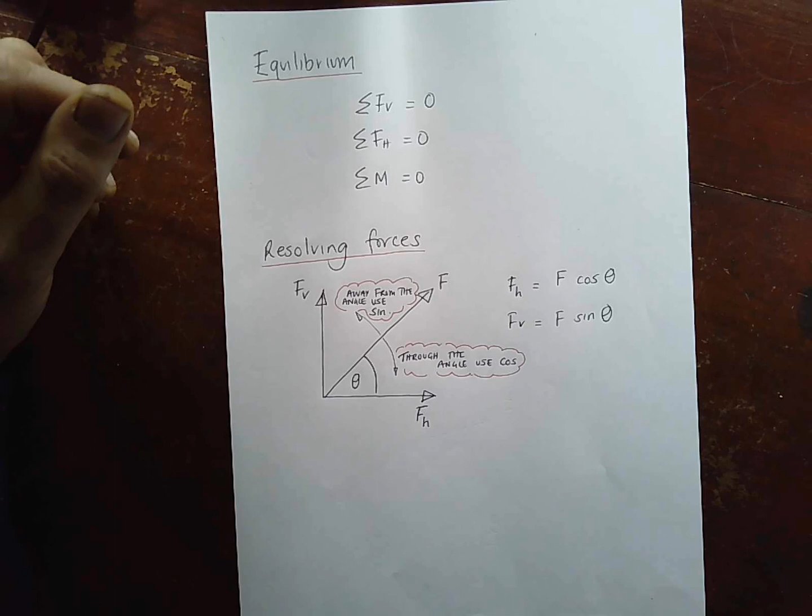One or two fundamental things. Equilibrium, right? Can someone explain to me what equilibrium means in terms of forces? Have you heard that phrase before? That is when a chemical reaction reaches equilibrium, I suppose.

In terms of forces, equilibrium means that everything is balanced. So if you've got something that is in equilibrium, in effect it will be at rest or travelling at constant velocity, because there'll be no resultant force, or the resultant force of all the things acting on that body will be zero, so it won't go anywhere or do anything.

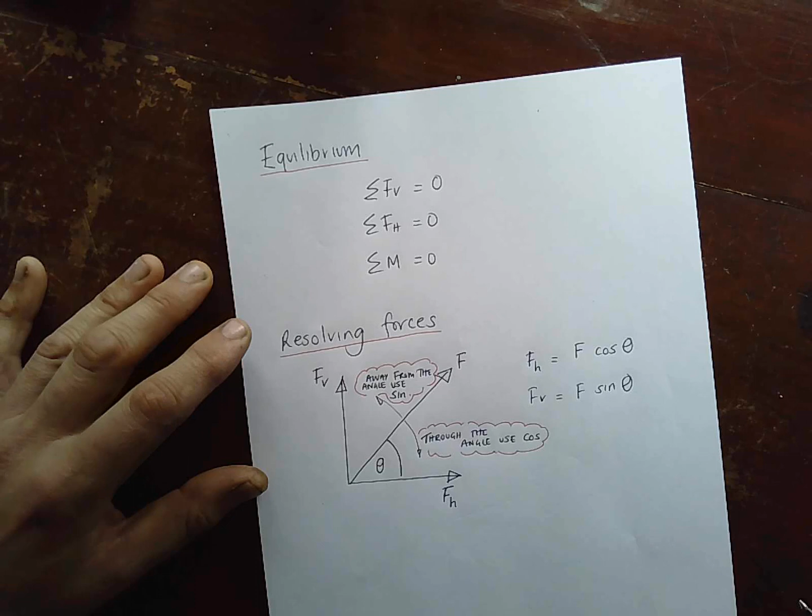Right? So if I've got a body that has forces acting upon it, so it could have a force acting in that direction, one in that direction, one in that direction. If that is not moving, then we know that all of these forces are balanced. This thing is in equilibrium. And so if I add up all of these forces, taking into account their directions, then they will add up to zero. So they're balanced.

Now, this is a mathematical way of writing that. So we've got vertical components of forces, we've got horizontal components of forces, and we've got moments. So there are three conditions for equilibrium really. You've got to have your vertical components balance, and your horizontal components have got to balance, and all add up to zero.

And also you can't have any moments in there as well, because if there were forces not acting at a single point but acting at two ends of a long body, so you had a force acting this way and a force acting this way, if those forces were equal and opposite, then that would fulfill these two parts of the equilibrium, because they will balance each other, so it wouldn't move anywhere.

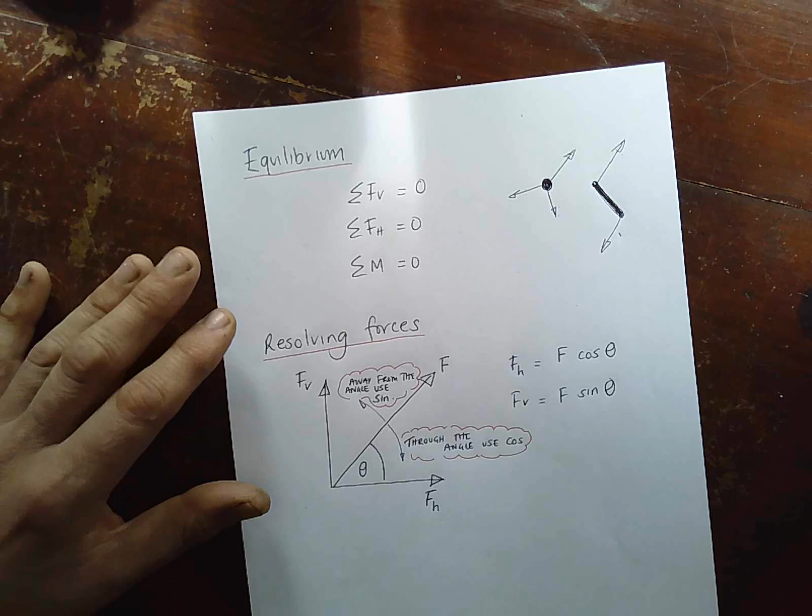Now we don't actually come to do much with these at this level or in this particular unit, but there are more complicated sets of forces and turning moments, where you have to work out the resultant force and the resultant turning moment and the distance of that turning moment from the line of action and all that kind of stuff. But we don't have to do that. You'll be glad to know. But we do need to have a good understanding of what equilibrium is, because there's a few questions and a few problems that I'll be showing you in a second. So you'll need a pen and a bit of paper for this.

And also, what we were doing last time: any force, so I've got a force F here that just happens to be going up at this angle, you can divide that force into a vertical component and a horizontal component. And that's important, because if you've got more than one force acting, it's very difficult to add them up taking into account their different directions. So what you have to do is what's called resolve forces. Each force in a system is resolved into its vertical and horizontal components, and then you can very simply add those two sets of components up and come up with your resultant fairly straightforwardly.

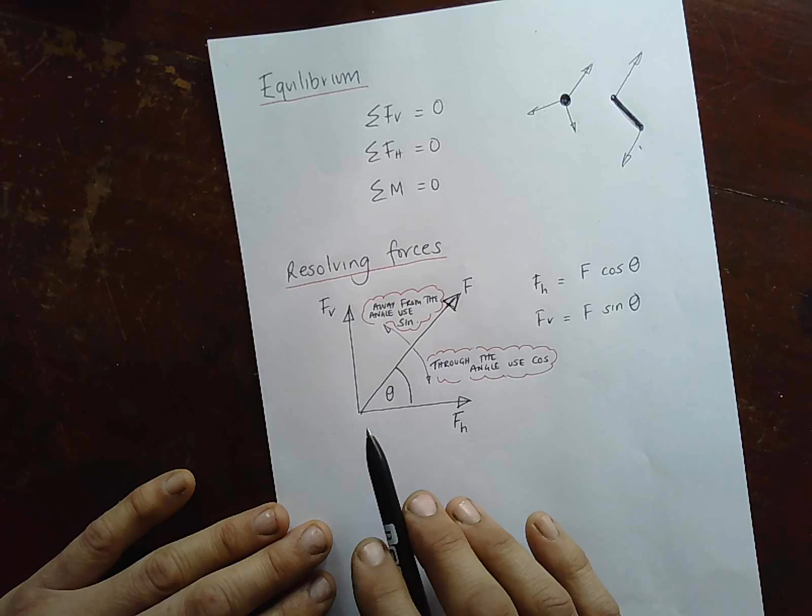Now, we did cover this last time, so hopefully I won't be telling you anything stunningly new, but it's just a quick reminder that in this particular scenario, where theta is that angle there and that angle is known, then if this is the force F, and I want to find the horizontal component, I'm going through the angle that I know, so F_H equals F cosine theta.

And the vertical component, if I rotate my force arrow, is moving away from the known angle, so that will be F sine theta. Now these aren't fixed. These are only true if you've got this particular scenario and this particular angle.

If I was to change this so I had this angle, then these cos and sines would actually flip over. So instead of trying to remember this, because it only relates to this one example where this is the angle that we're talking about, it's best to try and remember that if you want to translate or resolve a force through an angle, then you use the cosine, and if it's away from the angle, the known angle, then you use a sine. And we'll come to that when we do some examples in a second.

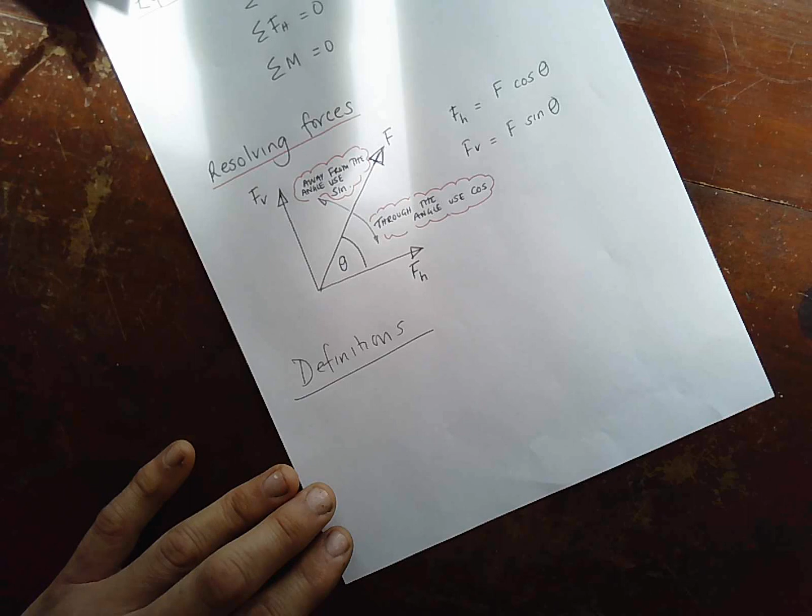There are another couple of definitions that we ought to just cover that are going to be on this first set of worked examples as well. So in terms of definitions we've got resultant and we've got equilibrant. And they're a couple of different types of forces.

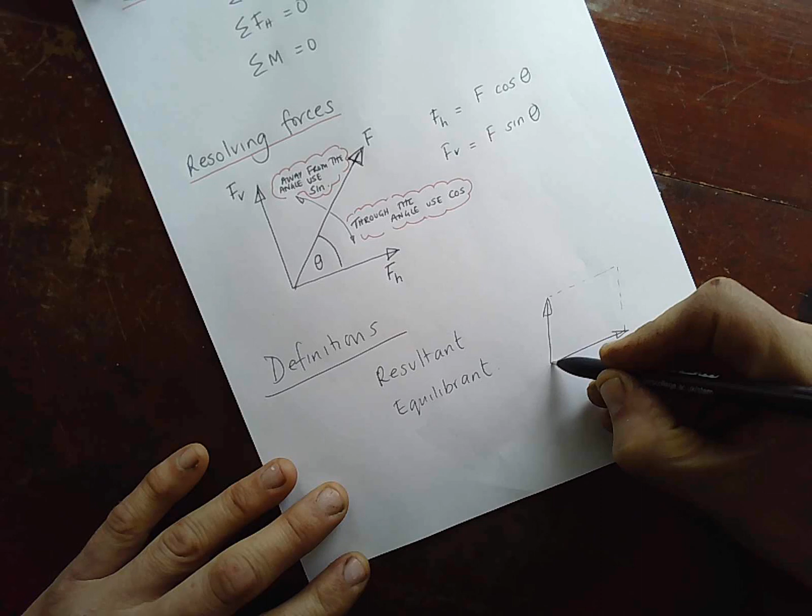So if you've got some forces acting, so you've got a force acting up there, say, and you've got another one acting over here, you can determine what the resultant force is by drawing your old parallelogram of forces, and that there would be your resultant. So that is a resultant. And this would be an instance where this system isn't in equilibrium, because if it's got a resultant force, then obviously these rules aren't true anymore, because if it has a resultant force going in a particular direction, then it'll go in that direction. So the sum of the forces acting on that point won't be zero, so it will be shifting. And that's the whole point of an equilibrant.

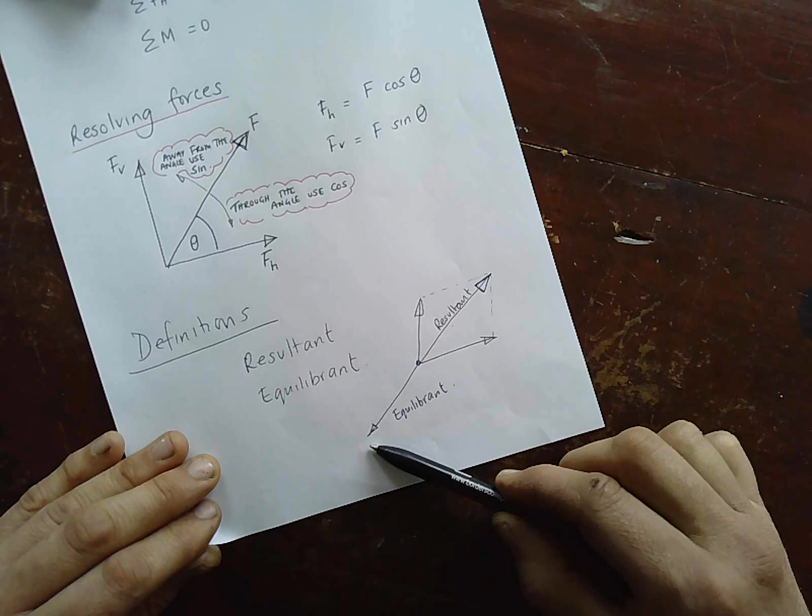So an equilibrant is a force that is opposite and equal in size to the resultant. And the idea of an equilibrant is that it will supply the force that is going to bring this system into equilibrium. So if you've got two forces acting that way and you're trying to find the force that you need to apply to rebalance that system, first of all you'd calculate the resultant, because that's the effect of all of the forces in that system just being replaced, all of the individual forces, with one resultant force that's the equivalent, and opposite and equal to that would be the equilibrant. And the equilibrant, if you added that into the system, would bring this system into equilibrium. So it would balance everything out and stop everything from moving. So we need to know those two definitions.

And I said I'll try and get this videoed and sent through to you.

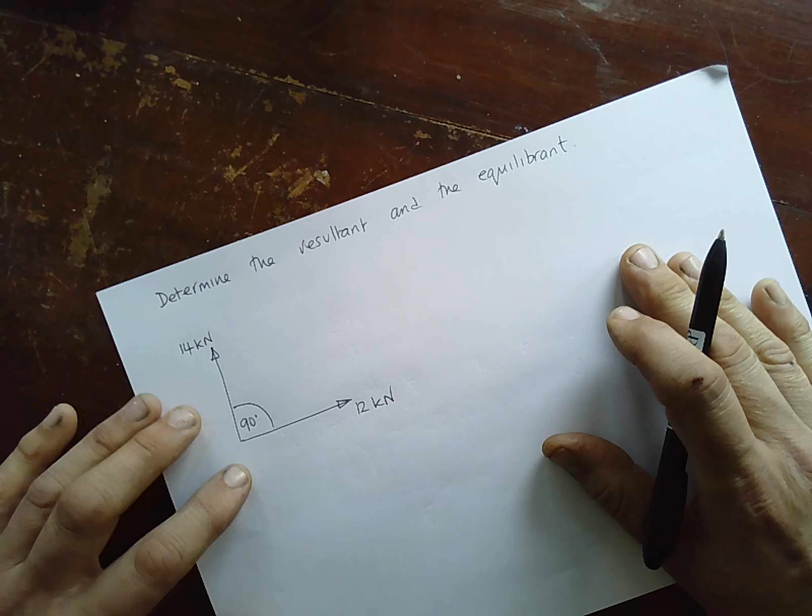So, question time. Determine the resultant and the equilibrant of this system. What is here? So, you know the angle and you know two forces. So we don't have to resolve anything in this case. It's a fairly simple method. Because these are at right angles, it's nice and easy. We can use Pythagoras. So if I complete this, what would be a parallelogram of forces, but now it's like a rectangle of forces, because it's at 90 degrees.

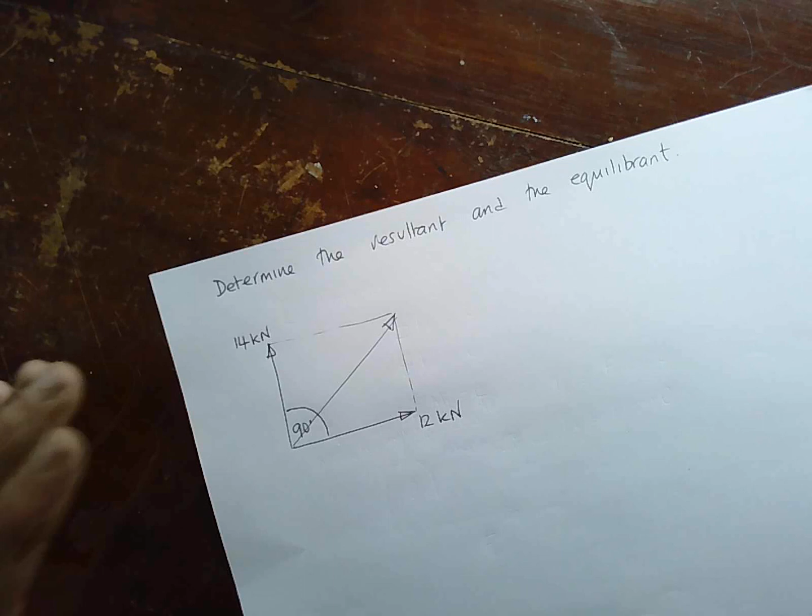And I know that if I was to draw this out on a piece of graph paper full size, I'd be able to measure these things with a ruler. And so if I had 12 centimeters that way, 14 centimeters that way, and then completed this square and then drew the diagonal in across there, then if I measured that, that would be the magnitude of my resultant, and if I measured that angle there, that would be the direction of my resultant. But we're going to work it out using maths, and we can work that out quite straightforwardly using Pythagoras, because we know that that's a right angle there, because if that's a right angle, that must be a right angle, so must that and that.

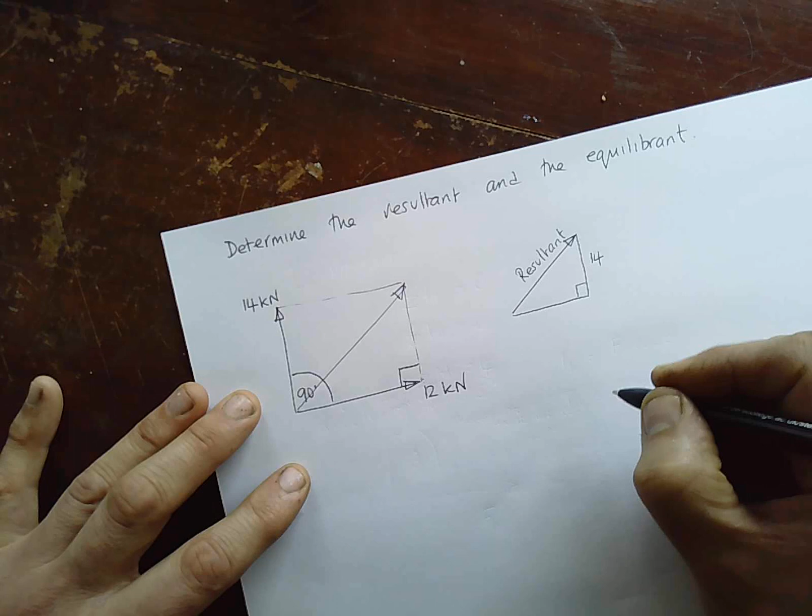And so I know that this dimension of this triangle here, if we just redraw that triangle to make sure everyone can see it properly. So that's what we're after. That is going to be our resultant force there. I'll call that resultant. We know that that's a right angle, and we know that that height there is 14 kilonewtons, and that length across there is 12 kilonewtons. So quite straightforwardly we can use Pythagoras to work that out.

So we know that in this case r squared equals 14 squared plus 12 squared. And so we can add those up and find what r is. Now we also need to be able to find theta.

And we can sort of intuitively know that if this is 14, if that was 14 as well, then this one will be at 45 degrees. But we know that it's not that because they're different sizes, so our angle here will be different. We would expect this angle to be smaller than, or would we? Depending, actually, if that's only 12 and that's 14, which way would it be? This angle would be smaller than this angle. So we're expecting this one to be over 45 maybe, and we'll work it out.

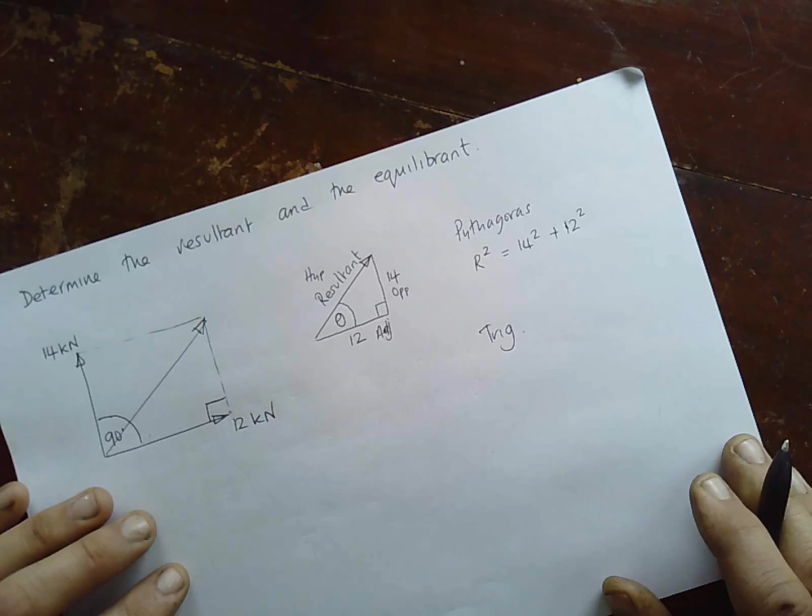So again, basic trig this time. And then what have we got? We've got a hypotenuse, and that's what we're trying to work out. We've got an opposite and we've got an adjacent. And so we can do the tan of the angle, can't we? So I know that tan of theta equals 14 over 12, and so I can calculate what theta is. So get your calculators out and just do those two quick sums for me, please, and tell me what theta is and also what the resultant magnitude is.

And I'm getting you to work it out for a number of reasons. A, to make sure you're still awake, and B, because my daughter's stolen my calculator.

So 49.4, that sort of thing goes in with my impression that it's going to be a larger angle than 45, so that's probably true. What did you get for the R? 340. We've got 14 kilonewtons and we've got 12 kilonewtons, and you're saying that this one's going to be 340 kilonewtons. I'm pretty sure you did too.

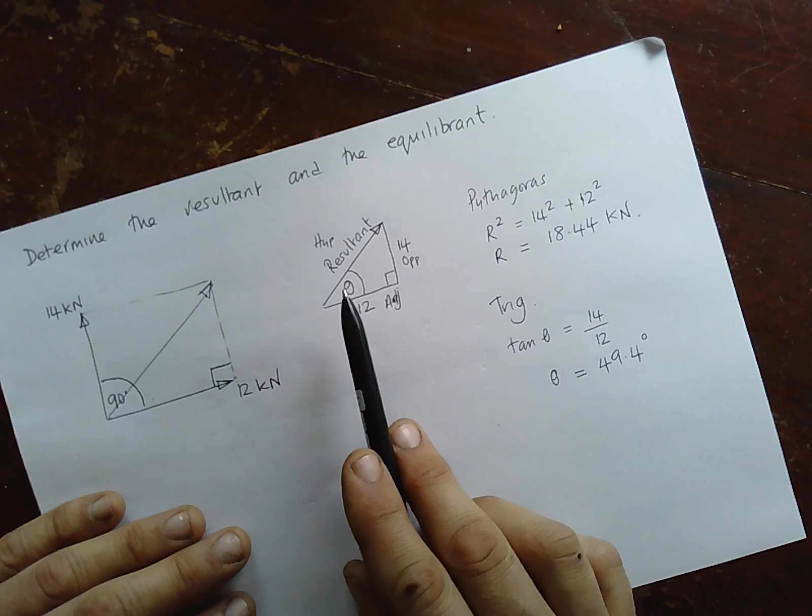Yeah, if you look at some of these things, don't just accept what your calculator spits out. That should have been screaming at you that, hang on, I can't suddenly convert 14 kilonewtons and 12 kilonewtons into 340 kilonewtons. That just doesn't scan. So I get the square root of that, which is 18.44 kilonewtons. Okay. So if I was to describe that resultant force, I would say the resultant has a magnitude of 18.44 kilonewtons at an angle of 49.4 degrees above the horizontal.

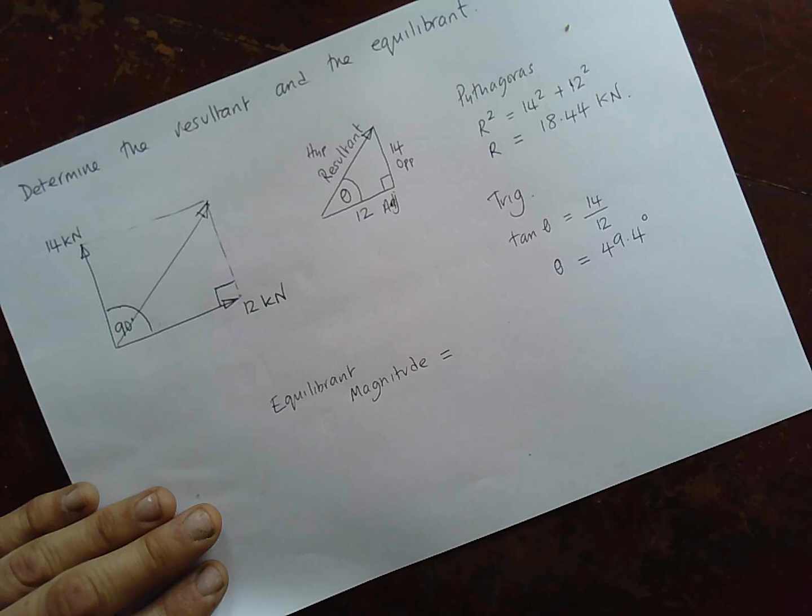Now, if I was to calculate the equilibrant, what would that be? What would the magnitude of my equilibrant be? We've got a resultant going in that direction. We've got an equilibrant now. I want to know the size of the force that's going to balance this resultant. So what's the magnitude of that equilibrant going to be? Have a guess. It's exactly the same. It's the same but in the opposite direction. So the magnitude is going to be the same.

So it's going to be 18.44 kilonewtons, but the direction, if we want to cheat, I suppose we could just say opposite the resultant. Okay, it's probably the easiest way to describe it. Otherwise, you would describe it as at an angle from something, but it's fairly obvious. If you've got a nice little picture in there, then in a direction opposite the resultant should be all right. Now you will need to be able to do that to determine the resultant and to then state what the equilibrant is, because you will know that one is the balancing force for the other.

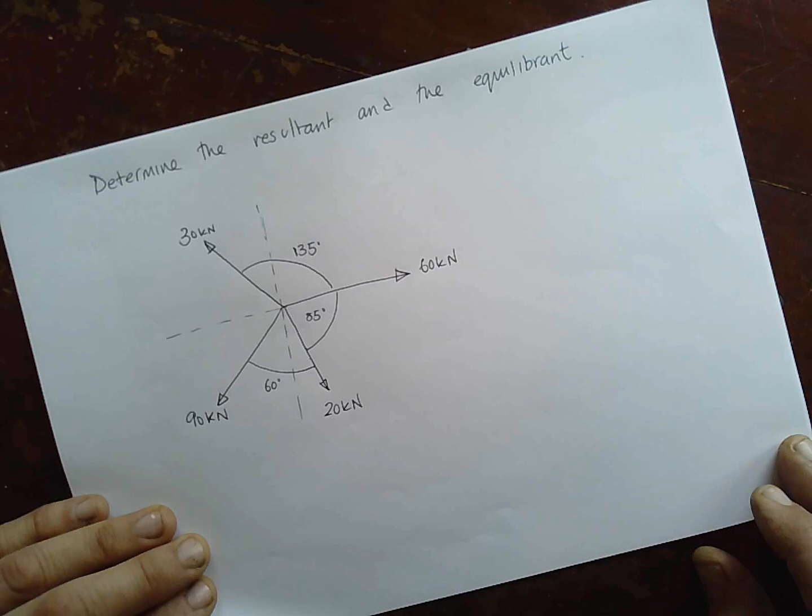So this one is a whole lot trickier, but the same or very similar question. So the resultant and the equilibrant of this system is a bit more complicated. So in this case, we've got to resolve this into a series of vertical components and horizontal components. Then we've got to draw an equivalent system consisting of just two forces, one vertical and one horizontal, and then we can do the same thing we did before. So the idea of these is this one's only got two forces in, this one's got several in, but effectively it's the same methodology behind it. It's all about determining the resultant. It just gets a bit more complicated, that's all.

Now the first thing we can see here is that we have some angles that are given, but the angles that are given leave us having to work a few things out, because what we're going to have to do here is find what the sum of the vertical components are and the sum of the horizontal components are. So we'll do that in a second, but in order to do that we need these angles. So these are the given angles. 85 is fine because 85 is in comparison to like the horizontal, so that's a useful angle.

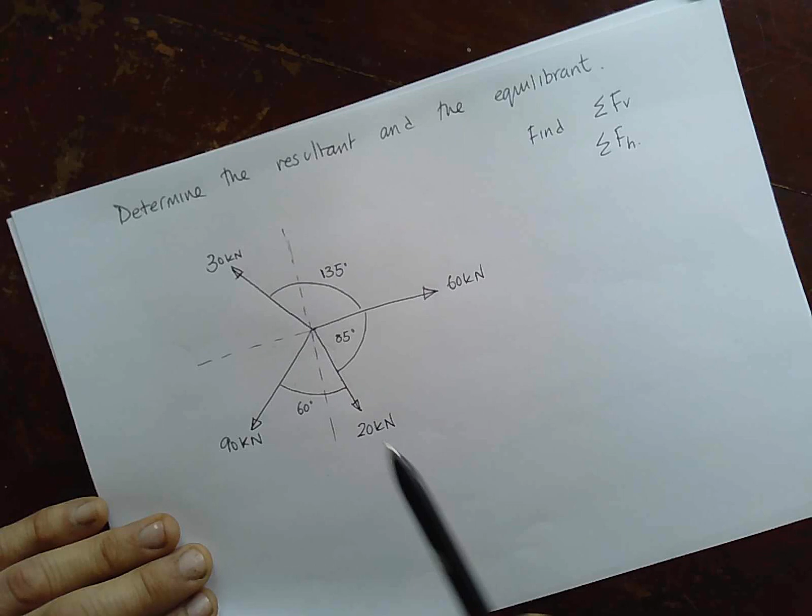These ones are less so. Right, so what we really need is that angle there between the horizontal and there, and that angle there between that force and the vertical, and that angle there between that force and the vertical. Currently the sum of those two is 60, and the sum of that lot is 135. So that angle there, what size is that angle? Just that part of that 135. Which leaves us with that one, which must then equal what?

And then we've got this bit. And this bit. Right, so don't sit there struggling, scratching your head about these big angles. You need to be able to just write them in. It's all a matter of saying there's 90 degrees in a right angle, and you can work them all out from there. Now this gets a bit more complicated because we're actually going to resolve forces now.

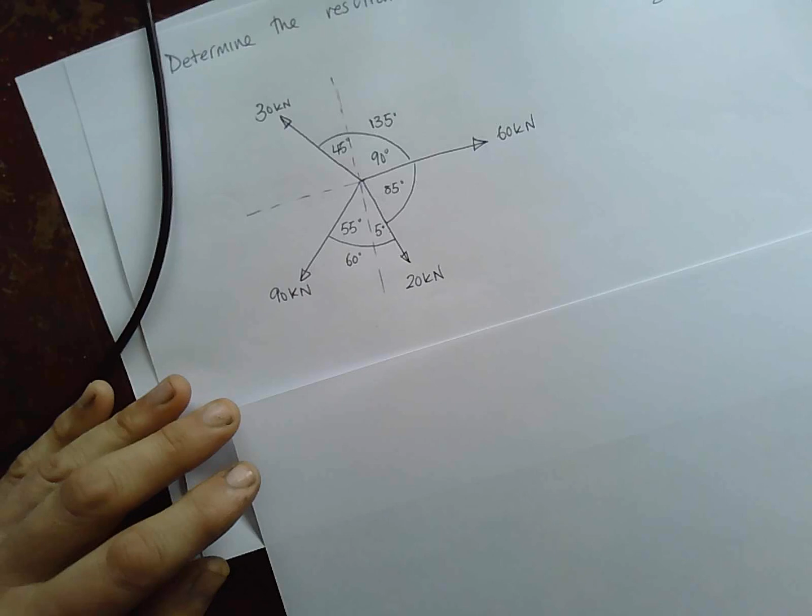So we're going to use this stuff about how to resolve into horizontal and vertical components. What we're going to do is consider each force in turn, and for each force determine those two components, or rather we're going to do all the vertical ones first and then all the horizontal ones. There are four forces, so this is going to get a bit complicated, so you might want to follow this on pen and paper as we go. So let's start with the sum of the vertical forces.

So all the vertical forces. This 30 kilonewtons here is going to have some vertical effect, and that vertical effect is going to come through the angle. Remember our little rule of thumb, that if you go through the angle you use the cosine. So I know that my component of that force in the vertical direction is going to be 30 times the cosine of 45. So that's that one.

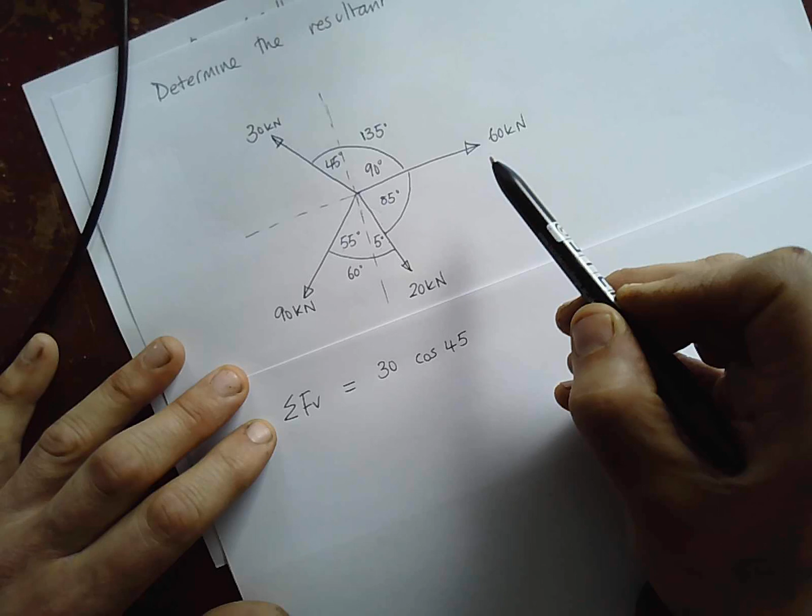Let's have a look at this 60 kilonewtons. Any ideas what the vertical component of that's going to be? You don't have to work it out. It would be 60 cos 90, but what's the cosine of 90? I don't know actually. It should be 0, shouldn't it? Let's have a look. Cosine of 90 is 0.

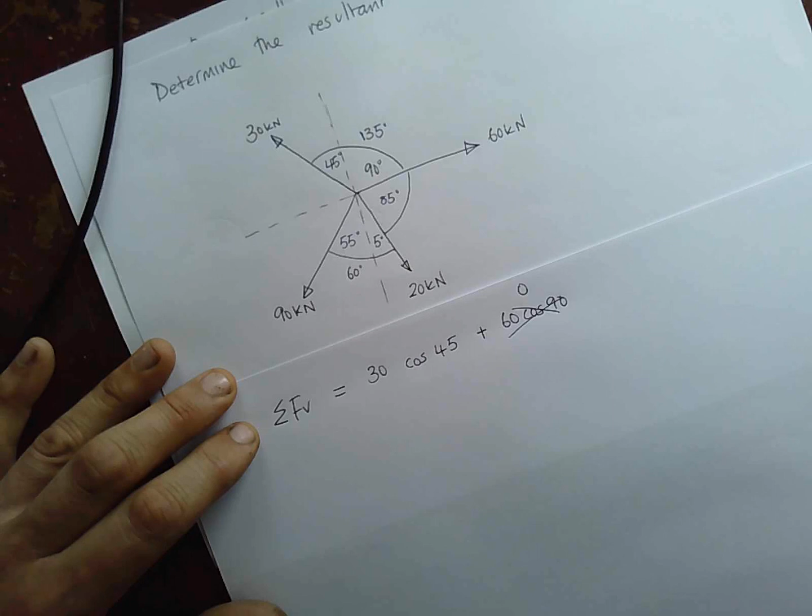So there is no vertical component of this horizontal force, and that makes sense, because if something's horizontal, then it's having no effect whatsoever in the vertical, so you don't get anything. So you can either put in 60 cosine 90, but you don't need to, because you know that's going to be 0, because the cosine of 90 is 0. And it's horizontal, so it has no effect in the vertical plane. Do you get it? Right, so let's carry on going round then.

Now I've got 20 kilonewtons here. So I've got a choice now. I can either use this angle or this angle. But I'm going to try and use lots of cosines, I think. As long as I've got the size of the angle that I'm going through, I can use cosine. So this 20 kilonewtons is going to be in the opposite direction of that one. That one's going upwards. This 20 kilonewtons is going to have an effect downwards. So it's going to be minus. That's the positive direction. We ought to really say that. That's the positive direction, and we'll have that way as the positive direction of the horizontal stuff.

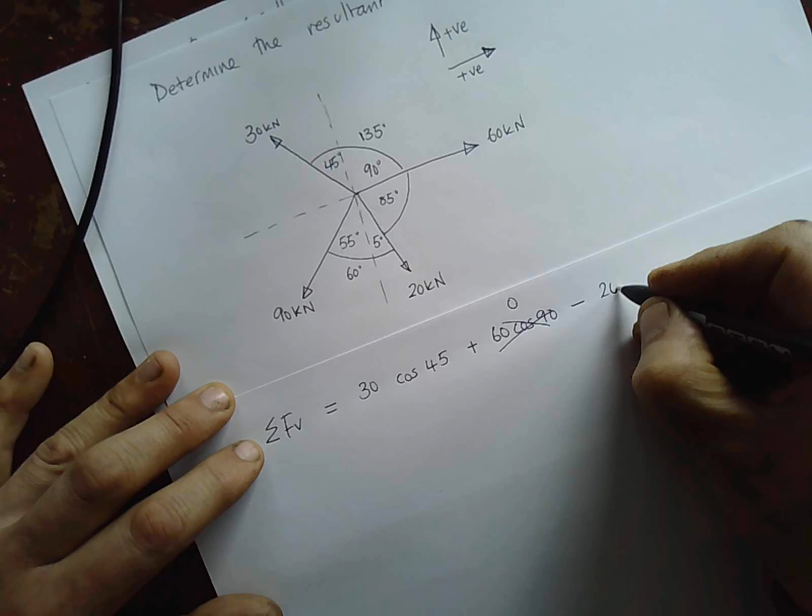Positive vertical, positive horizontal. Okay, so because that's coming down, I'll say it's minus 20 kilonewtons cosine of 5. And this 90 kilonewtons here is also coming down, and I know that's 55 degrees, and I'm going through the angle again, so it's minus 90 times the cosine of 55 degrees. Right? I'll let you work that out in a minute. So those are the vertical components, and if you add all of those together, you can replace all of these with one single equivalent vertical component, and we'll do that in a second. But let's get all of the horizontal components this time.

Again, we're going from left to right as positive. So we've got that one, and that is just going to be 60 kilonewtons because there is no angle, as it's directly in that direction anyway.

And that is going to be plus this 20 kilonewtons, because it's on this side of the center line, it's going to have some effect in this direction. So that's going to be 20 times, if we put it through there, the cosine of 85. Or I could use the sine of 5, because I'm moving away from 5, but I'm actually moving through 85. And you'll find that the cos of 85 is the same as the sine of 5. That's just how the cosines and sines work. So it doesn't matter which one you use, as long as you use the right ratio.

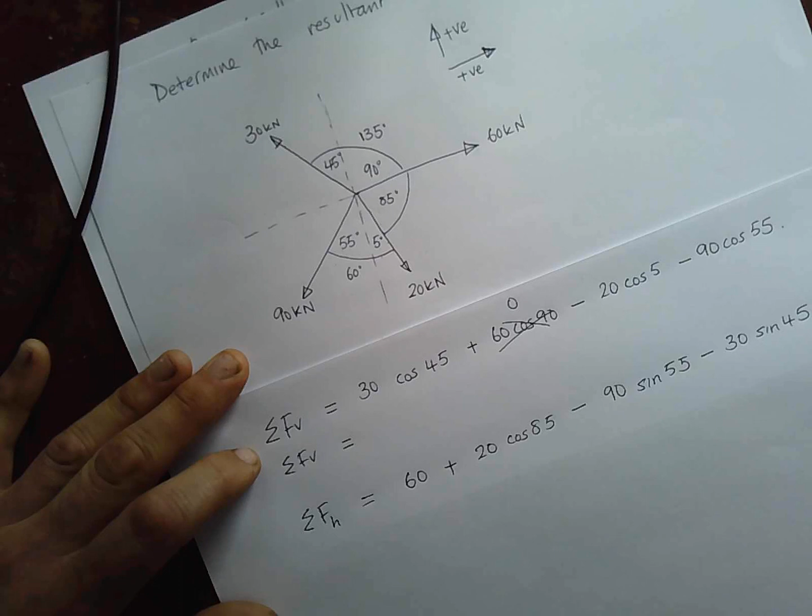And these two forces then, these will be working in from right to left, so there'll be minus ones. So in this case we've got 90, and we're winding up, so we're going away from that 55 angle. So that's going to be sine of 55. And we've got this 30 kilonewtons, again it's going to be going in this direction, so it's a minus 1, and that too is going to be rotating that way away from the known angle. 30 sine of 45. Right, so work those out for me and add them up. So I want to know what the total vertical components are, and I want to know the total horizontal components, please.

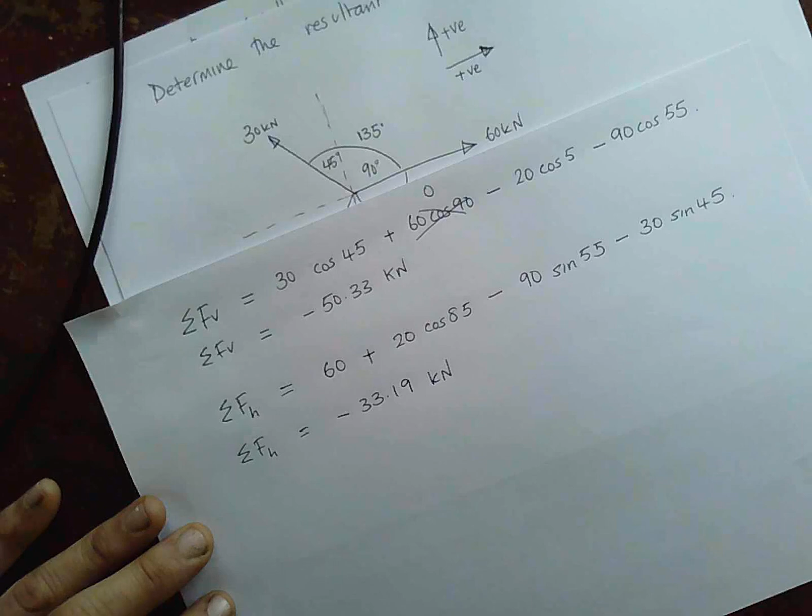Anyone got an answer for the first one yet? I got that as well. Minus 50.33. And these are in kilonewtons, remember. You have to get your units right. Does everyone agree that it's minus 50.33 and minus 33.19 kilonewtons? Oh, Drew's giving me the thumbs up. So what do we do now?

Well, we've now got two forces that if we apply to this system will enable us to replace all of those forces that are currently working. But we need to be a little bit careful, because if we remember our positive directions, so we said that one is going to be the positive vertical direction, that one is going to be the positive horizontal direction, and both of these ones are negative. So we're going to have a vertical component of this force now that is acting downwards that way, and that is going to be 50.33 kilonewtons. And we're going to have a horizontal component going in the negative direction, and that's 33.19 kilonewtons.

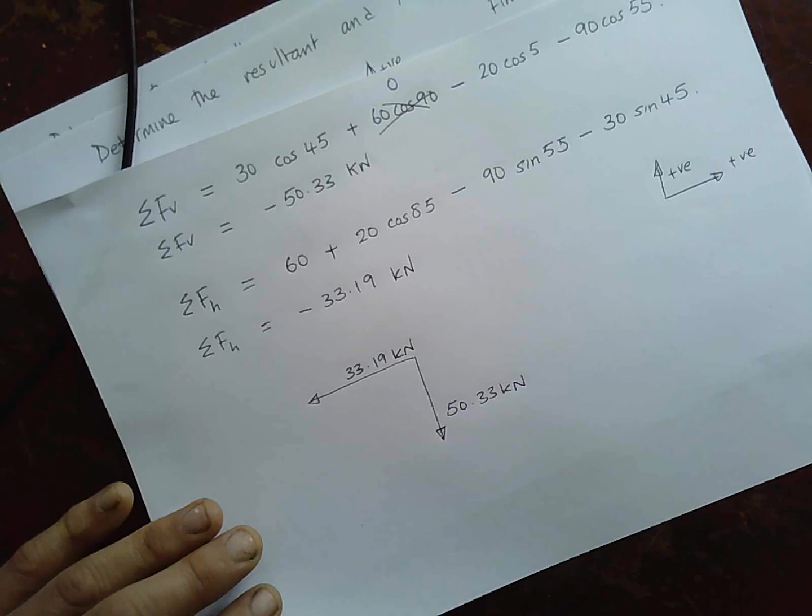Okay, so all of a sudden now, that horrible complicated system of 1, 2, 3, 4 different forces all acting at different angles, we've simplified it into two different forces by being able to add up all of the vertical components and all the horizontal components of everything. So we've simplified that system down into two forces, which turns it into this problem again. All right, so now it's simple.

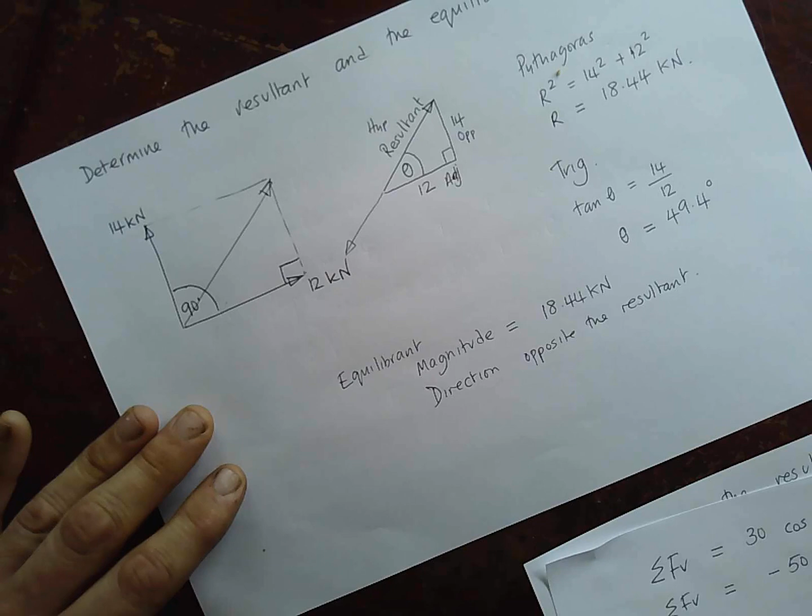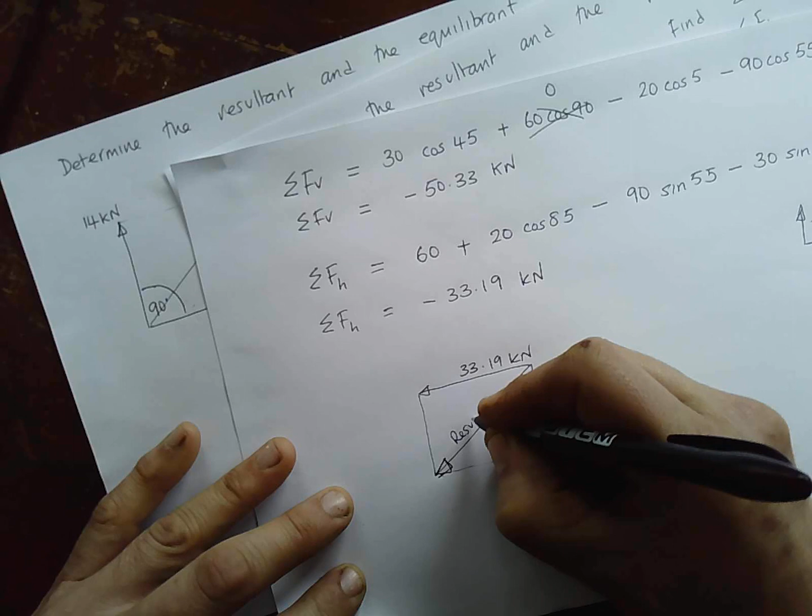What we need to do now is calculate the magnitude and direction of the equilibrant and resultant. So we'll start by calculating what the resultant is, and then by implication we'll know that the equilibrant is the same magnitude but in the opposite direction. So what I'd like to do, please, is work that out and give us a shout in a minute. So we've got two forces there, and what we're after is, complete that parallelogram of forces. What we're after, please, is the size of that resultant. So you work it out for me. And we also want to know about the direction, so we need to calculate that angle there, theta.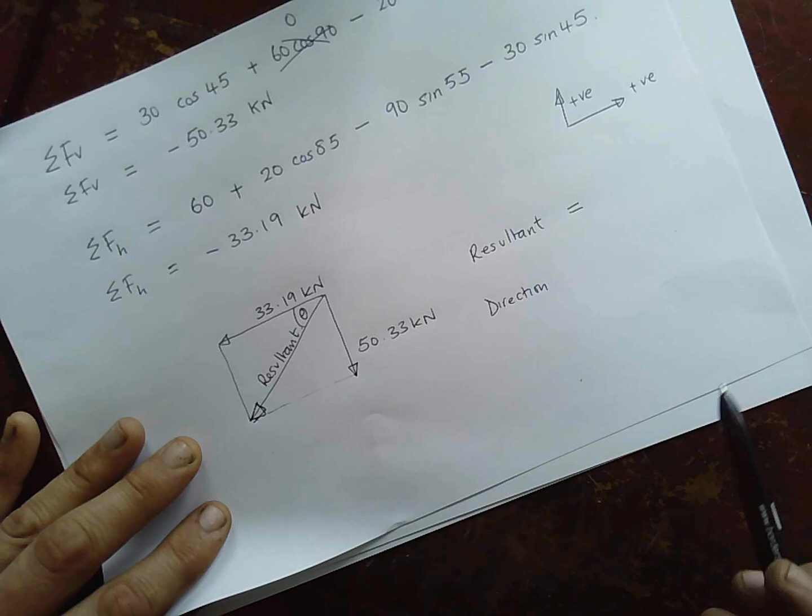So if I was doing this, what would I do? Well, I'd say that r squared equals 33.19 squared plus 50.33 squared. And then I'd find the square root of it, and I would find that r equals, does anyone calculate that? Okay, so the resultant is 60.29 kilonewtons.

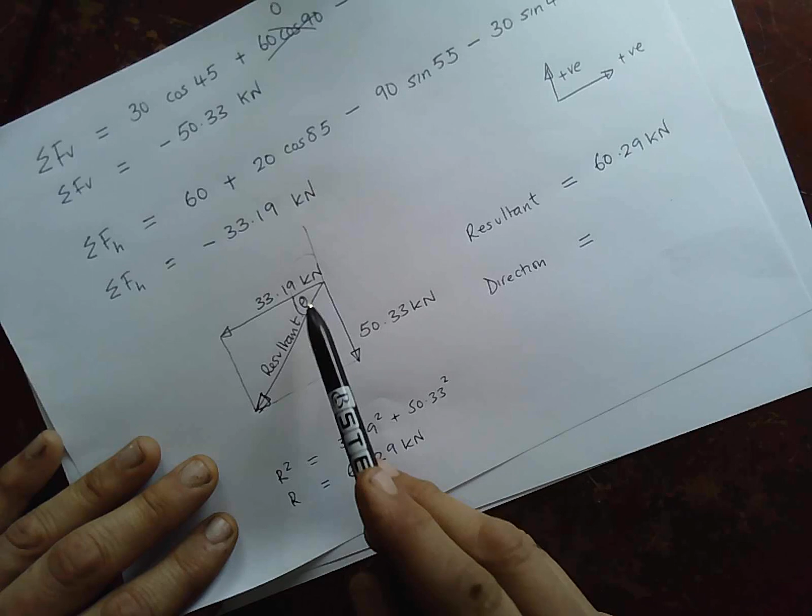And the direction, we need to find that angle theta, or ostensibly we could find that angle, or there's lots of ways you can define direction. You could find a bearing from that all the way around from a direction going positive. As long as you've got a drawing, a sketch, and you've got an angle, you don't necessarily have to describe it in words if it is actually described in your sketch for you. So I'll probably define that angle there. And let me know when you've calculated what that angle is.

You've got a triangle that you can draw out again if you'd like, and that's 33.19. That length there is the same as that length there, so that's going to be 50.33. You know that angle there, that's a right angle. How are you going to find what theta is there?

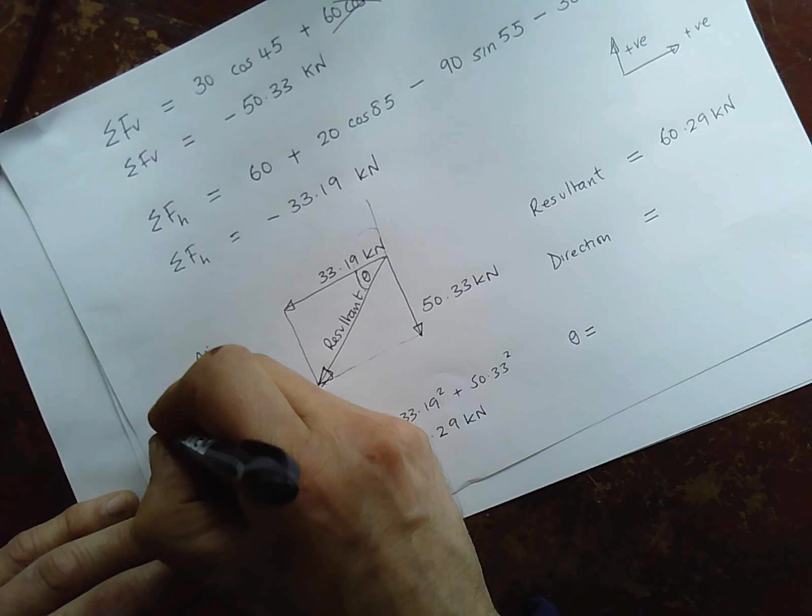That's your hypotenuse, that's your adjacent, and that's your opposite. So theta would be tan to the minus 1 of opposite over adjacent, 50.33 over 33.19, because tan of theta is opposite over adjacent. And then you can work out what theta is.

Do you agree with that? Sometimes I do make daft mistakes when I'm doing these, as we are prone to do. I got 56.6. So did I.

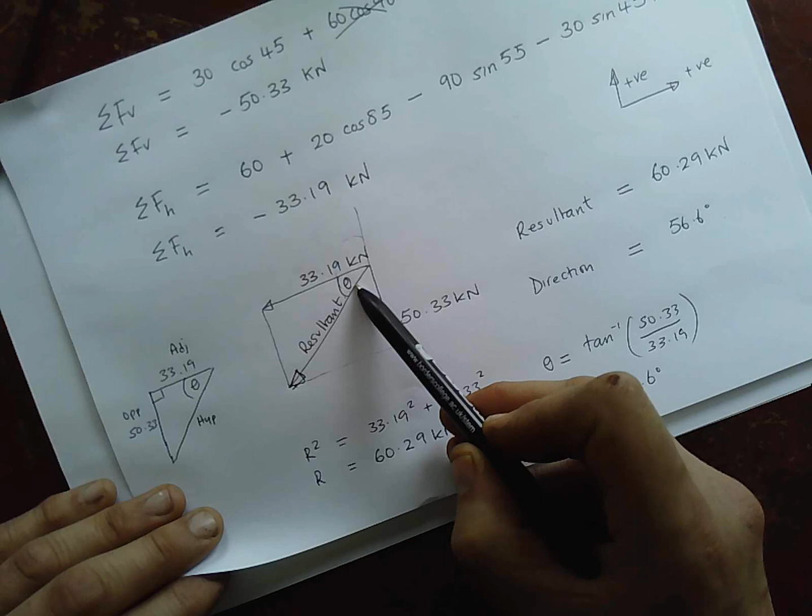So the direction is where theta equals 56.6, and then if you want to describe it in words, you might say from right to left, 56.6 degrees below the horizontal, or just draw a picture, which is usually the better way of doing it. As long as you've defined what that angle is, it's fairly straightforward for someone to work out what the right answer is.

Okay, so go back to the question, what we're after. Determine the resultant and the equilibrant. So what's the equilibrant going to be? Well, the equilibrant is going to be up there, and you might want to add this to your drawing as well, because these questions really should be accompanied by sketches. Or if there's a sketch in the actual assessment already, you might just add to it and annotate it. So what's the resultant?

So the resultant is that direction. What's the magnitude of the equilibrant? Correct. Exactly the same size in terms of magnitude as your resultant, but it's in the opposite direction. Okay. Equilibrant is 60.29 kilonewtons in the opposite direction to the resultant.

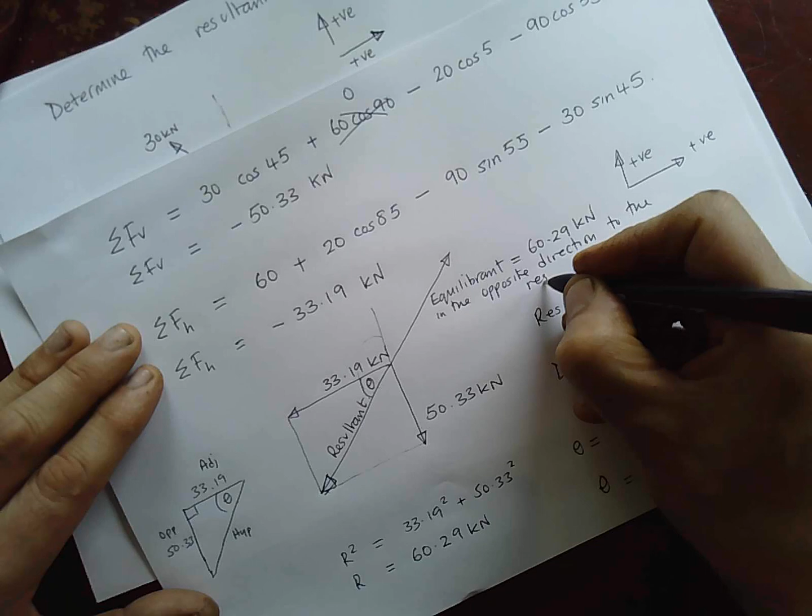So important bits, there's all that bit, that's the solution there, and that is your answer to those two bits of that question. And this way of resolving forces into vertical and horizontal components and then being able to add them all up is a common theme which will develop through a few more worked examples that we've got to go through. These questions, by the way, are of a similar standard to the ones that you will find in the assessment.

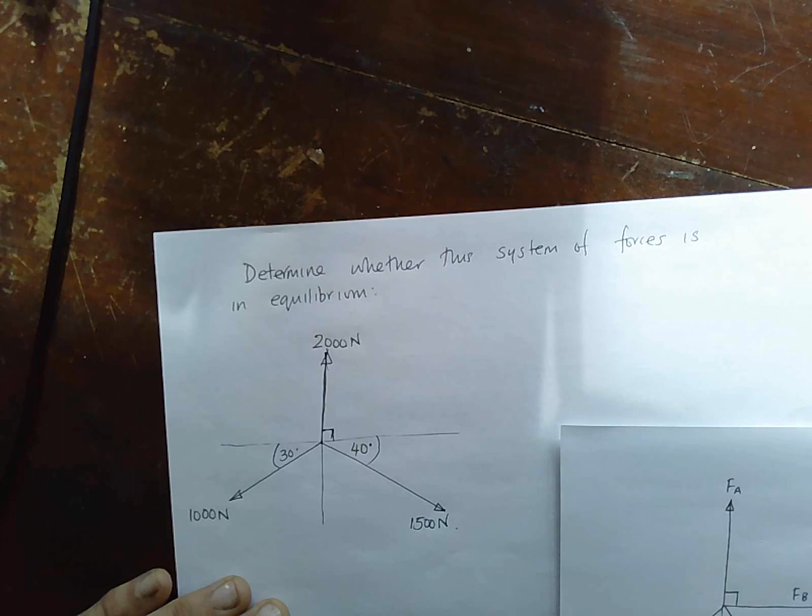Okay, so let's see what we've got. There's one particular one that's really naughty. We'll leave that one till last. Now we've got a couple here. Right, let's do this one. So determine whether this system of forces is in equilibrium.

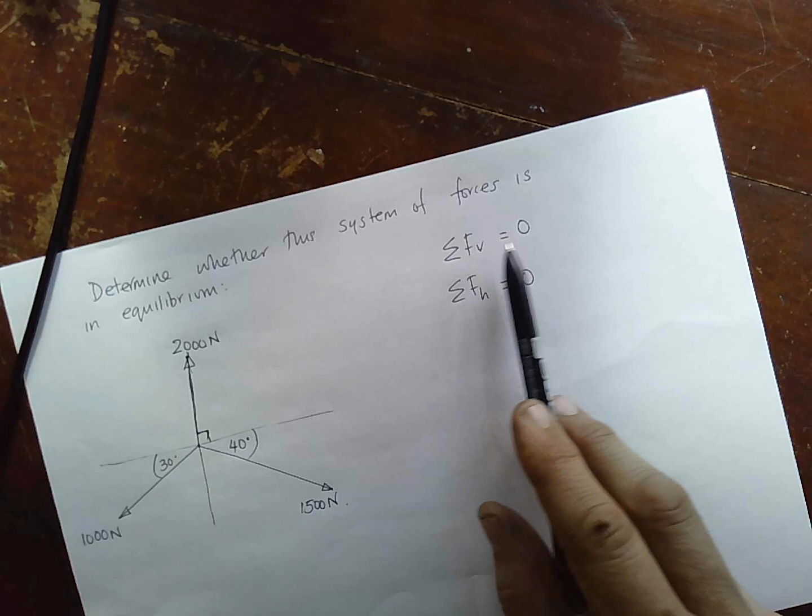Right then, if my system of forces is in equilibrium, then the sum of all the vertical components and the sum of all the horizontal components would both equal 0. If that's the case, the thing's not going anywhere, all the forces balance, it must be in equilibrium. So I can either calculate both sets of force elements, or just do one. And as soon as I prove that either of these is not 0, then I've also proven that this system of forces is not in equilibrium.

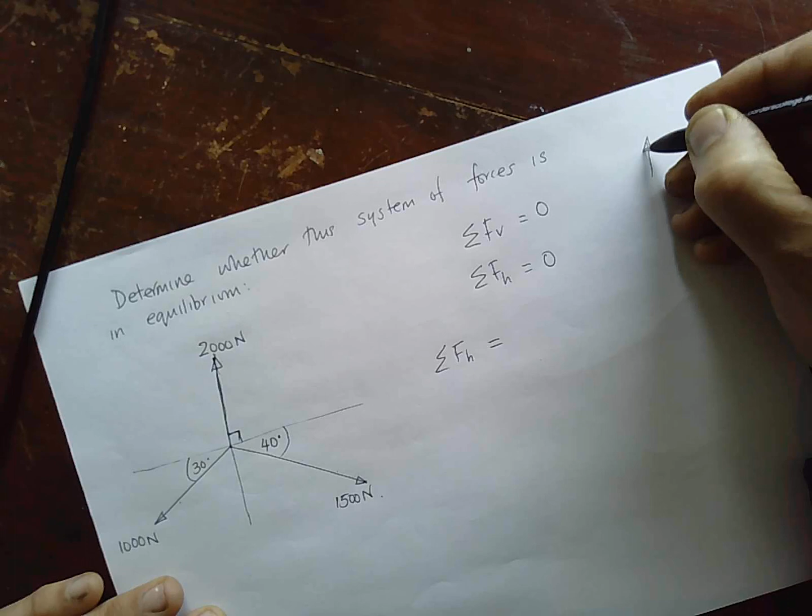So let's consider, well, the easiest one to do would be the horizontal ones, because the 2000 newtons there is vertically straight up, and so it hasn't got a horizontal component at all. So that'd be a fairly straightforward way of doing it. So let's consider what the horizontal forces are going to be. Horizontal, that's going to be the positive direction, and vertical, that's going to be the positive direction straight up.

So horizontal forces then, we've got this 1500. What would be the horizontal component of that force? It'll be a +1 because it's going in the plus direction. It would be 1500 multiplied by what? Cos 40. Yep, cosine of 40, because that's the force that we're resolving. It's going up there, that's the direction we want to resolve it into. It's going through that 40-degree angle. Through the angle, you use cos.

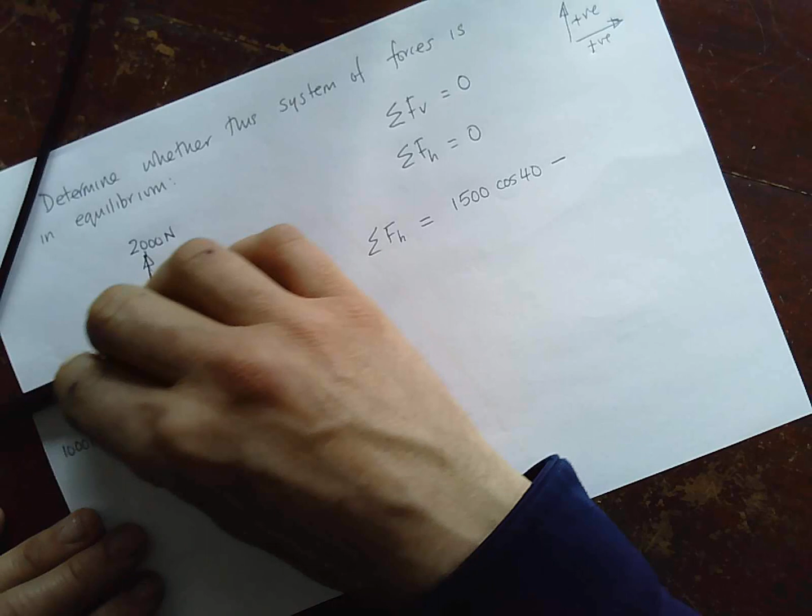Okay. The 1000 Newton force down here is actually going in the opposite direction, so that'd be negative, because if I resolve that into that direction there, it's going in the wrong direction. It's going in the negative direction. So let's take away 1000. What would be multiplied by what?

Sine 30. You see, you're falling into my trap. Are you going through the angle or away from the angle? Away. That 30 degrees, you're resolving this 1000 Newton force in that direction there to find what this component is. So are you going through the angle or going away from the angle? Through it. If you go through the angle, what do you use, cosine or sine? Cosine. So cosine of 30.

Exactly the same principle we did with this one. That's why I said that those rules for calculating the different components aren't hard and fast. It depends what angle you know as to what trig ratio you put in. If you get confused, you can draw the triangle and put your hypotenuse, opposite and adjacent in there, and work out which trig ratio you need to use. But it's easier if you just remember, if you go through the angle it's cosine, or away from the angle it's sine. It's a rule of thumb, but a very useful one.

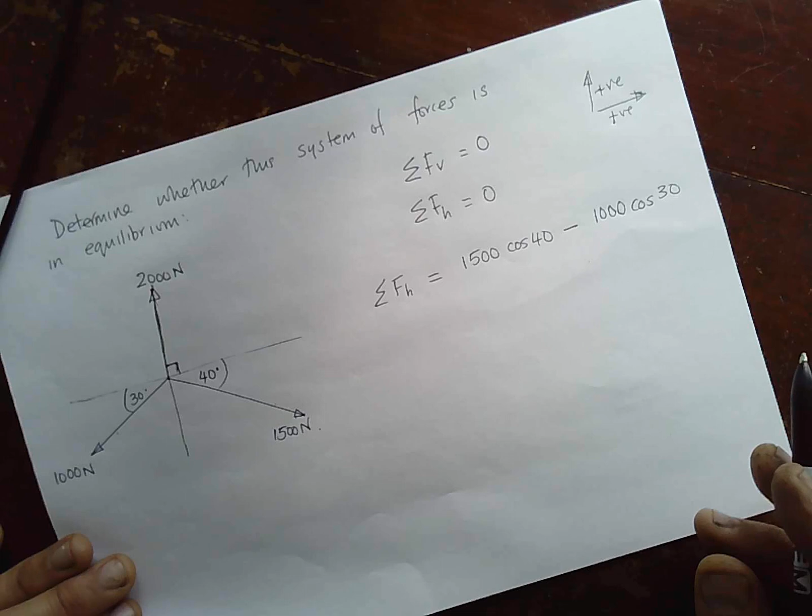So the sum of the horizontal components is going to be a component of force acting in this direction equal to 1500 cos 40, and then another one acting in this direction that's 1000 cos 30. If this is balanced, if this equals 0, then it's in equilibrium. So work that out for me. Does 1500 cos 40 take away 1000 cos 30 equal 0? Or if not, what does it equal? I don't get 0. What does that mean then?

If it's not 0, what can we say about this system? Determine whether this system of forces is in equilibrium. Is it or isn't it? It's not. Okay, so 866. So we know the sum of the horizontal forces is there or thereabouts. 1149, take away 866, 283 newtons. So we know for a fact that this isn't in equilibrium, because the sum of the horizontal components is not equal to 0, and that would be enough to prove that.

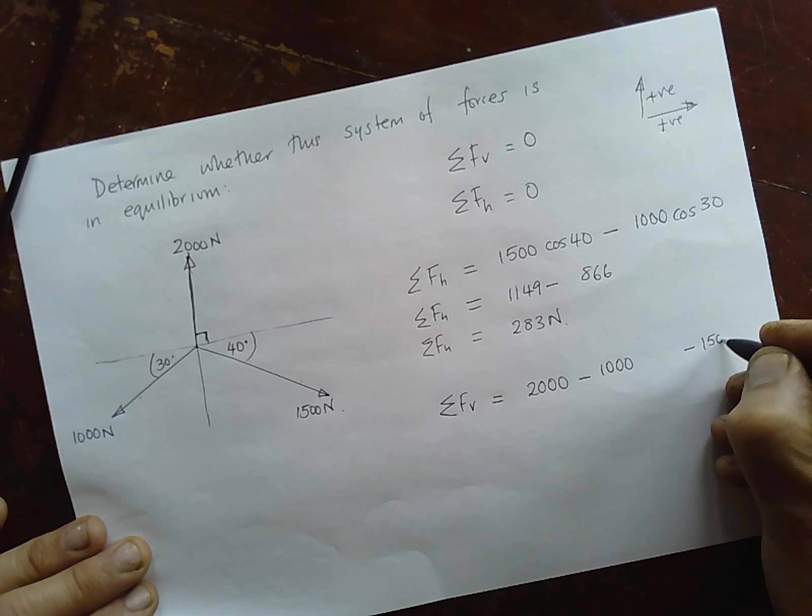You could just stop there if you wanted to, but because we're demonstrating understanding, what I'd like you to do, please, is calculate the sum of all the vertical forces. That would start off with 2000 newtons in the vertical direction, and all of that's acting vertically. There is no angle to concern yourself with. And then it would be take away 1,000 times something, take away 1,500 times something. So what would be the two vertical components of this force and this force? Fill in the blanks and then come up with an answer for me, please. What you've got to think about is whether I'm going to use the sine of the angle or the cosine of the angle.

So, anyone want to chip in and complete that line of working for me, even if you've not got an answer yet? Is it sine? Because you're going away. It is. So the 1,000 here will be going through this way. We're resolving into this direction, so we're coming away from that 30 degrees. So that would be sine of 30. And this 1,500 here, again, we're swinging it down this way, away from the known angle again. So if you go away from the angle, it's sine. So we're going to have sine 40. And then it's a case of that, take away that, take away that.

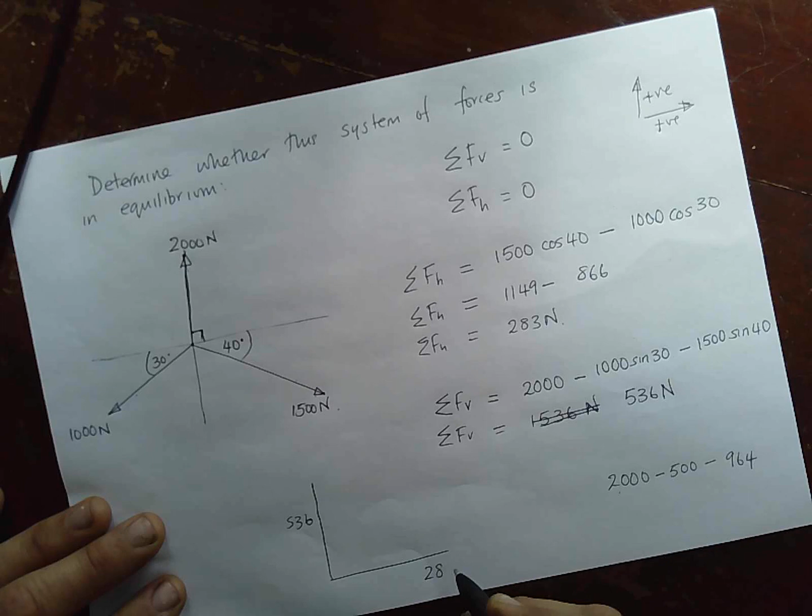Okay, so you know for a fact that those aren't in equilibrium, and actually you could, if you wanted to, go on and calculate. That's the vertical one, so that'd be 536, and the horizontal one would be 283. You could go and calculate what the resultant was, and then you calculate what the equilibrant was. So just determine whether the system of forces is in equilibrium, and it's not, and then if the question went on to say, if it's not, find out what the equilibrant would be, then you could do that.

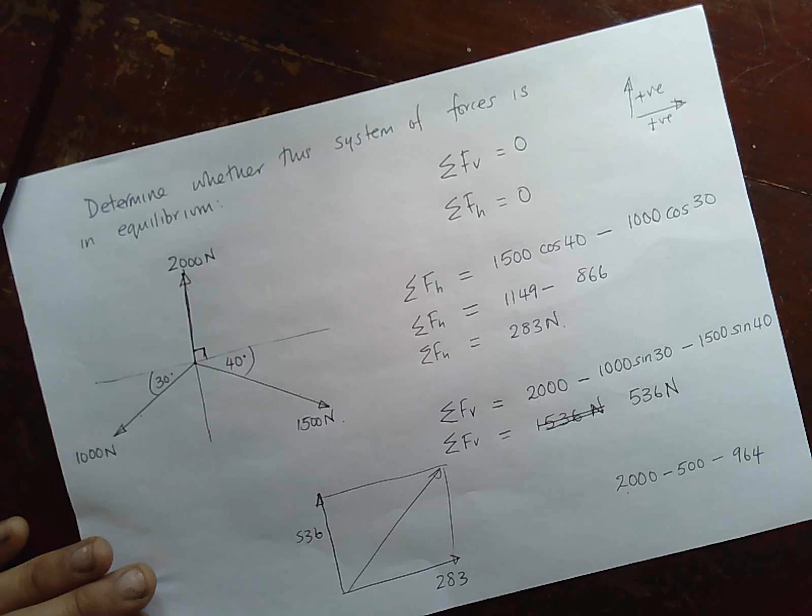But yeah, that's just a way of resolving forces again, turning three forces into this system of two forces, and for the reason this time not to calculate the resultant, but just to say that these two rules that need to be fulfilled for this system to be in equilibrium aren't fulfilled because we have got some force. They're not balanced and sum to zero, so they're therefore not in equilibrium. Right, now we're building up to the really difficult one. This one not so much, but it takes some thinking about.

So in this case we've got a system that's got two forces that are unknown, and we need to calculate both of those unknown forces. So again, we're going to do exactly the same thing. We're going to separate the system and all the different forces into their horizontal and vertical components, and then we're going to be able to work out, hopefully somehow, what FA and FB are. So first thing we're going to need to do is determine what the sum of all the horizontal forces are.

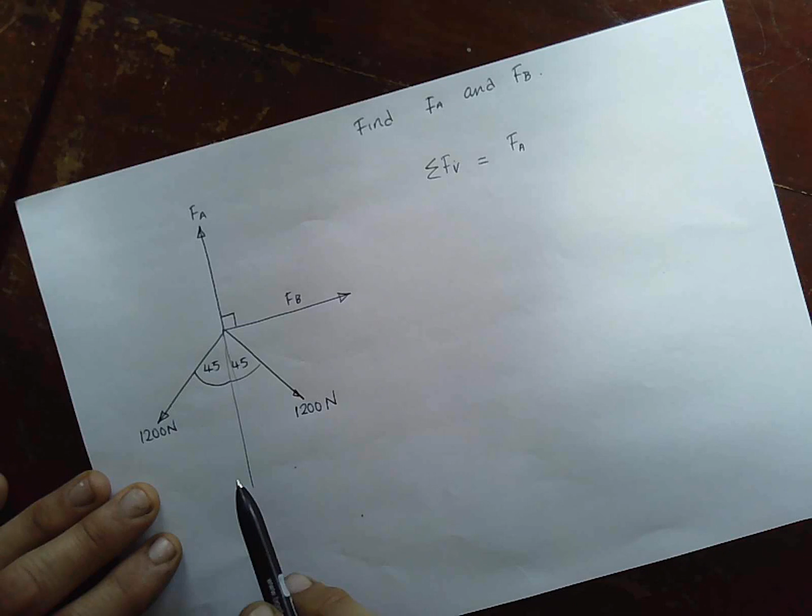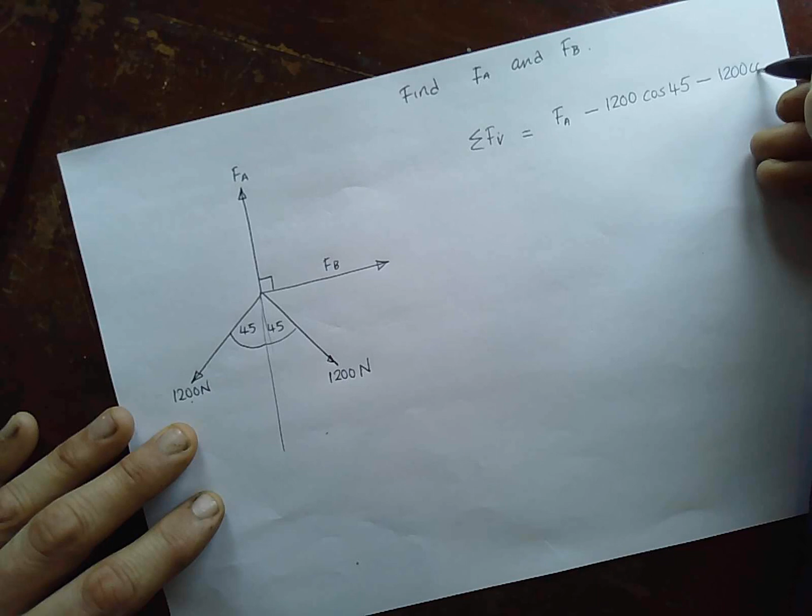And let's do verticals first. So vertically speaking, big one there, we've got FA, this unknown force, FA. FB here, because that's purely horizontal, there will be no vertical component to it, so it has no effect in the vertical direction. This one, and again remember we've got upwards as being positive and left to right being positive. This one down here is going to be acting downwards in the negative direction, so that is going to be negative 1200, and I'm going through that 45-degree angle. So if I go through the angle, it's cosine. And this 1200 Newton one here too is also going to have an effect in this direction, and so the 1200 cos 45, and we take away another 1200, and again it's going through the angle, running out of paper, cos 45.

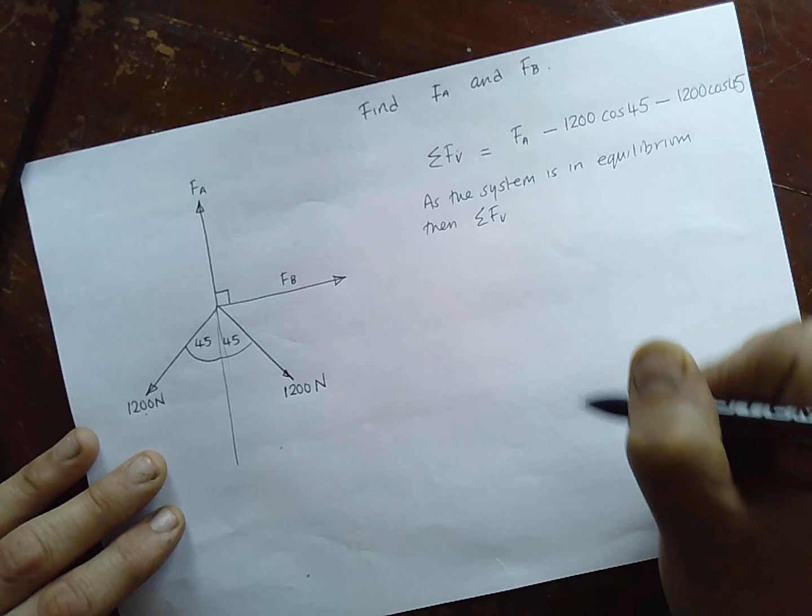And from that we know that if this thing is in equilibrium, which is part of the question actually, it is in equilibrium, and it did state that, or would have stated that in the question had it been written out in full. So we know, because the system is in equilibrium, then the sum of all of those vertical components equals 0. So we know that 0 equals this unknown force minus 1200 cosine 45 minus 1200 cosine 45 again, because they just happen to be the same size and in directions that are similar angles.

So if I want to just rearrange that slightly, then I can say that FA, if I'm going to separate these to both sides, I would add that one to that side, add that one to that side, so I've got 1200 cos 45 add 1200 cos 45. Does that make sense? Because that's now 0 at that side, so I'm taking these two to that side, but I'm writing FA equals. Deliberately designed to confuse you a little bit maybe, but if we separate it out like that, these two become positive, which kind of makes sense because we know that FA is going to have to be positive to balance these forces that are both going vertically downwards. So calculate what FA is for me, please.

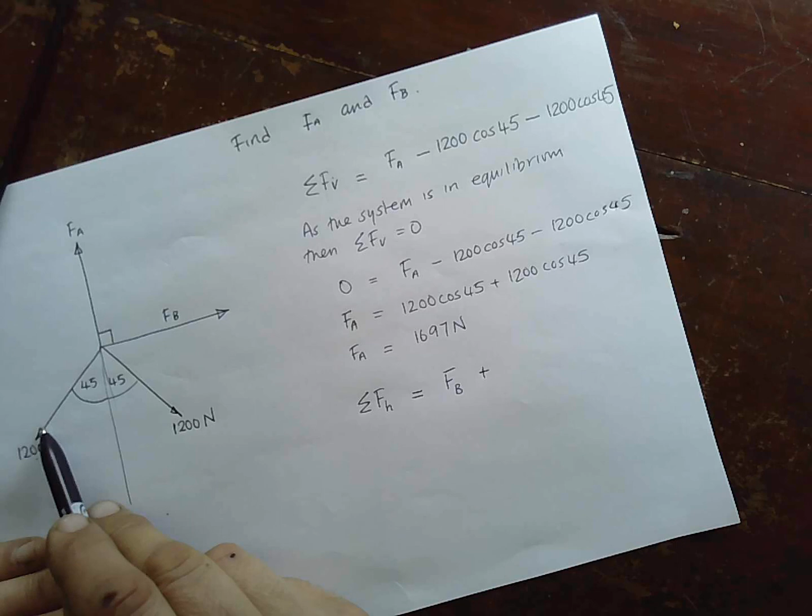Now, what I'd like you to do now is find the sum of all the horizontal forces. And that is going to equal FB, which is in the positive direction. And then we're going to add the horizontal component of this force and take away the horizontal component of that force because it's going in the opposite direction. So, complete that sum and then work out what FB is, please.

So what have you got to complete that sum now? What's your line of working look like? Do you want to tell me, Drew?

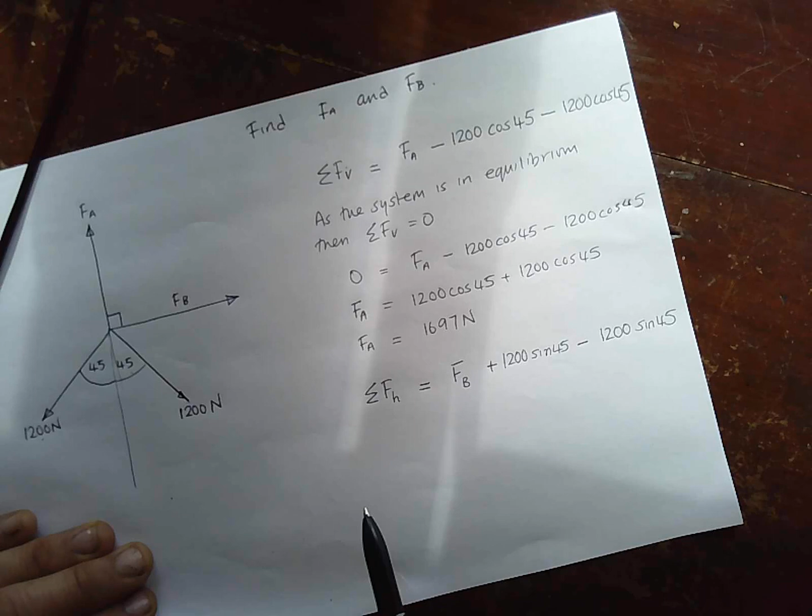So again, then we know that as the system is in equilibrium, the sum of FH's equals 0. So we know that 0 equals FB plus 1200 sine 45, take away 1200 sine 45. So what do I get if I take away 1200 sine 45 from 1200 sine 45? Well, I get 0, don't I? So I know that actually FB in this instance is 0

because these two forces already balance, which kind of makes sense if you think about it, because they're acting at the same angle and the same magnitude but in opposite directions. So it makes sense that the horizontal components of these two forces will balance. And if these balance, then this system's in equilibrium, and so FB must equal 0. Because if FB doesn't equal 0, it'll be unbalancing this thing and spoiling the equilibrium, and it'll start moving somewhere.

But don't be surprised sometimes if you do get a 0 answer. Have a look at the geometry and often it will make sense. Anyone else get that? Understand that? Not get that?

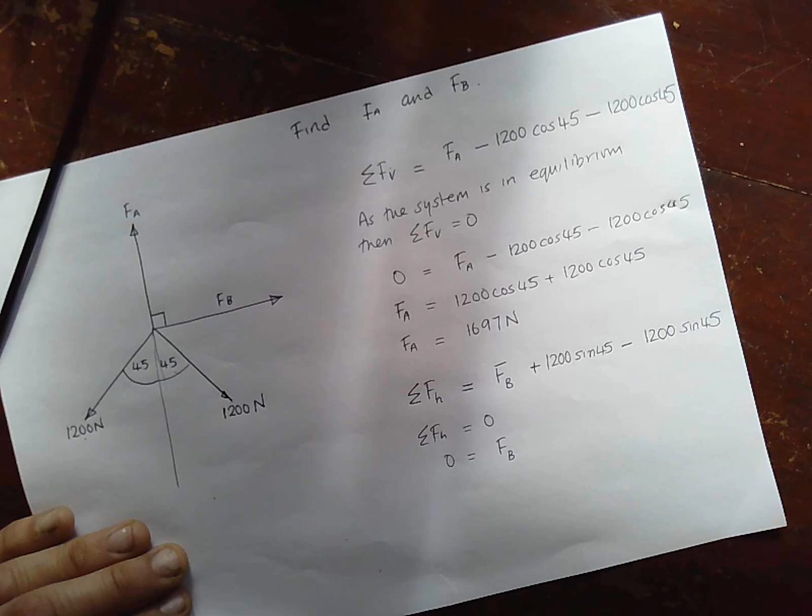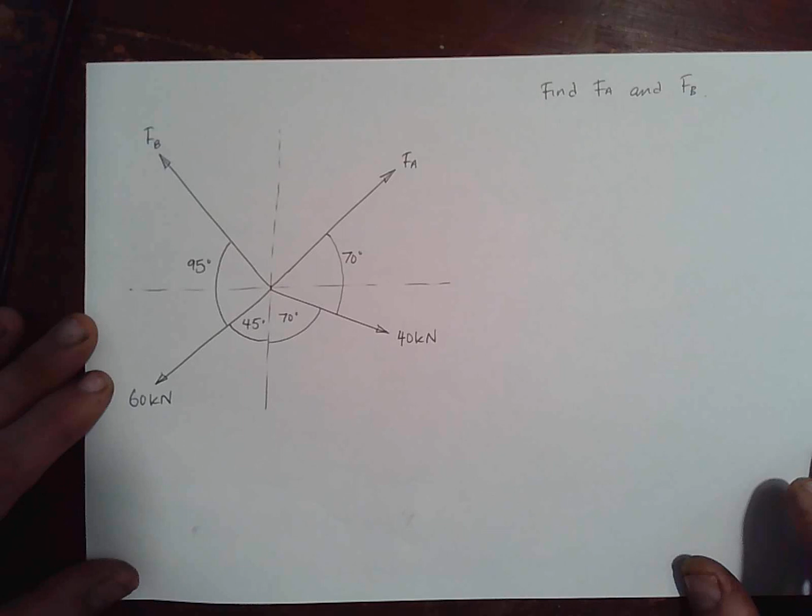Okay, so now we've got a system where I have to find FA and FB, and this is dead complicated because we've got two unknown forces, FA and FB, and this one's a bit more difficult to sort out. So let's take it one step at a time and have a look at how these angles work. So just like before, I've been given some fairly major angles, but not the individual angles that I may find a bit more useful. So 45 degrees from the vertical, that's fine.

I've got 70 degrees there from the vertical, that's fine. What I could do with is some angle for FA and FB that ties that to a horizontal or a vertical, because this distance between two forces is not a lot of use to me really. So taking into account that these are 90-degree quadrants, I want to find, well, what are the missing angles? So split that 70 up and split that 95 up. So what would that angle there be, for instance?

It would, because overall it's 90 and this is 70. And if that's the case, what's this angle? 50 again, because we know that that 20 and that 50 equal that 70. Along the other side, what's that missing angle? Yep. And lastly, that missing angle. Yep.

Right. So we can almost ignore those now. They're the ones that are given in the question, but now we've got some more useful angles that tie everything into these vertical and horizontal directions. Now we've got quite a lot of forces and lots of things going on here, so the working is going to get a bit complicated, but it's not difficult, it's just more of it.

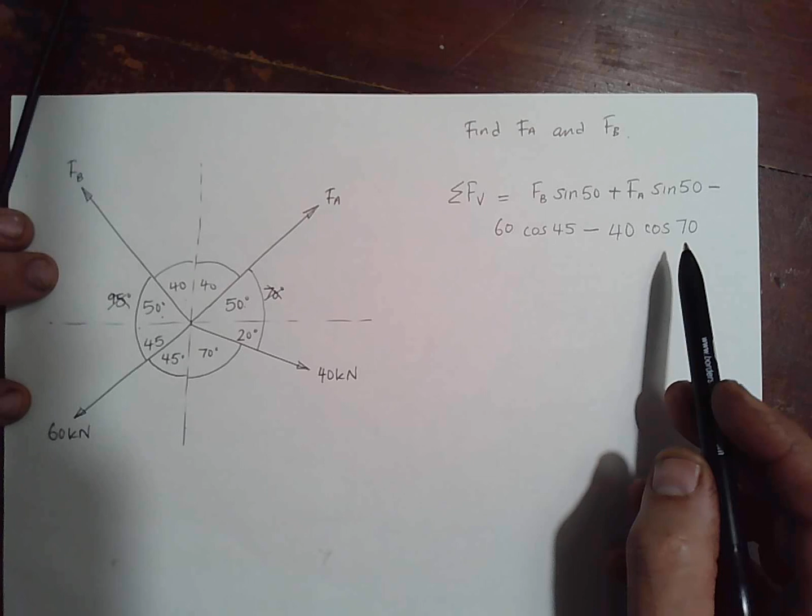And then we've got the 40 kilonewtons here again. That's going to be going in the negative direction downwards. So we've got 40, we'll use the cosine again, going through that 70-degree angle. Okay. Now we can sort of simplify that a little bit, and we can turn that into numbers. And we'll do that in a second. In fact, I'll turn that into numbers while you go and have a look at what the horizontal ones are.

Equals that. So we're going to follow a very similar process, but instead of resolving things in the vertical direction, we're going to be resolving things into the horizontal direction. So FA is going to be positive this way, and that 40 kilonewtons is going to be positive this way, and that's going to be negative FB somewhere that way, and negative 60 somewhere that way. But write that out using the right angles and the right trig ratios, and then we'll come and have a look at that in a second. I'm just going to replace all the cosines in this with actual numbers while you do that.

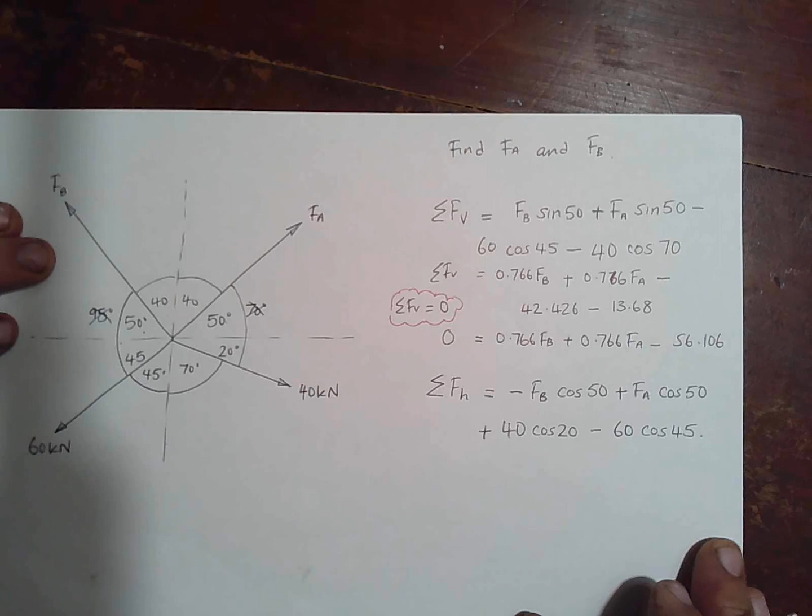And then what we're going to do is do what I've just done up here and turn this into some real numbers. So we have FH. Let's have it in the same order that we have those in. So we've got minus FB and the cosine of 50. I don't know whether this example is going to work very well. It's 0.643, let's call it, plus FA times 0.643, because it's the same because of 50, plus 40 times the cosine of 20, 37.59, and then take away 60 times the cosine of 45.

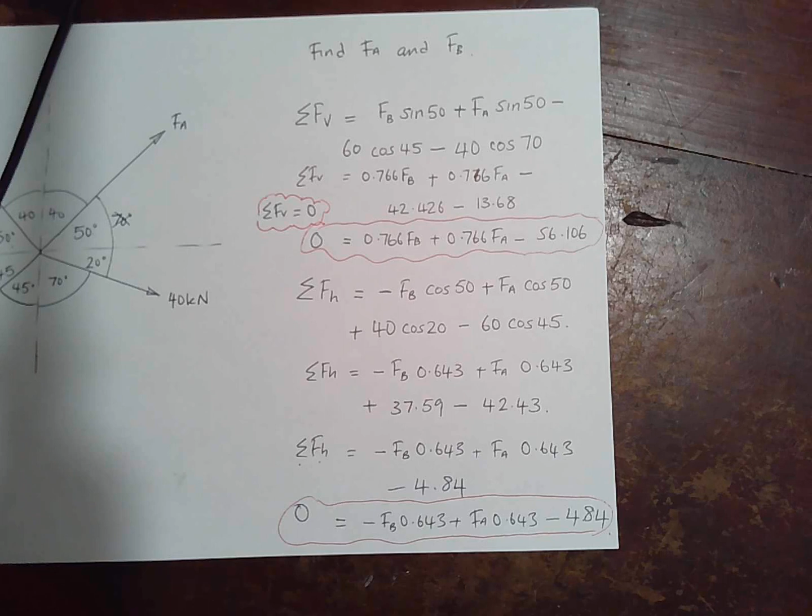Right, so lots of numbers in there, but what we've got now are two formulae. So that's all the difficult resolving of forces bit done. And now we've got an entirely different question. What I've got here are two equations in two unknowns, otherwise known as simultaneous equations. Hooray! So we've done all the hard bit of the geometry and resolving the forces and the directions and the cosines and sines, and I've ended up with two quite horrible looking formulae that I will now need to solve using one of the techniques that we've done in the past for solving simultaneous equations. And the one I want to use is

elimination. So what I'm going to do is rewrite these again, and we're going to change the emphasis of this now from a problem about resolving forces, we've done that bit, into a problem about solving simultaneous equations. So I'm going to write these simultaneous equations out again. And we might as well leave them equal to 0 for the time being. So we've got 0 equals 0.766 FB plus 0.766 FA minus 56.106. And I'm going to call that equation 1.

Okay, we've got equation 2 as well, and that came from the horizontal forces. So that comes out at minus 0.643 times FB plus 0.643 FA minus, see, loads of opportunities here to make a mistake. So now we've got our two formulas for our two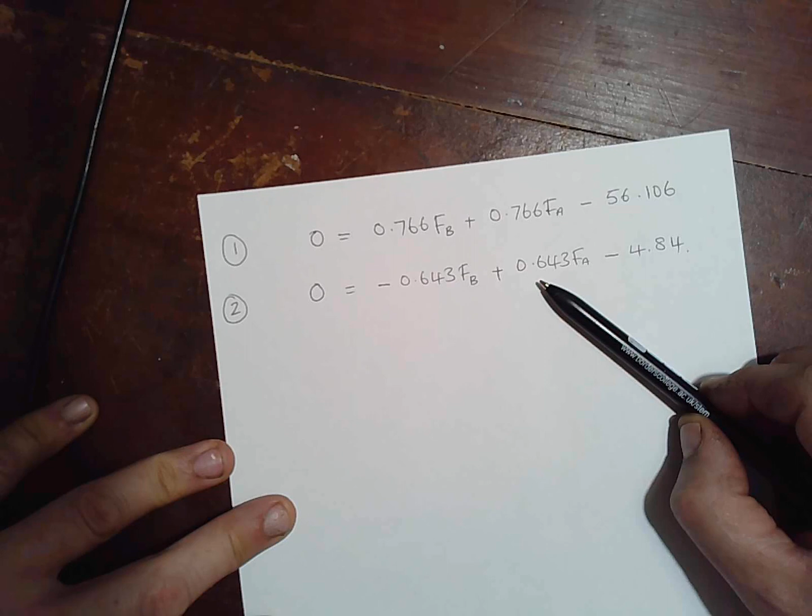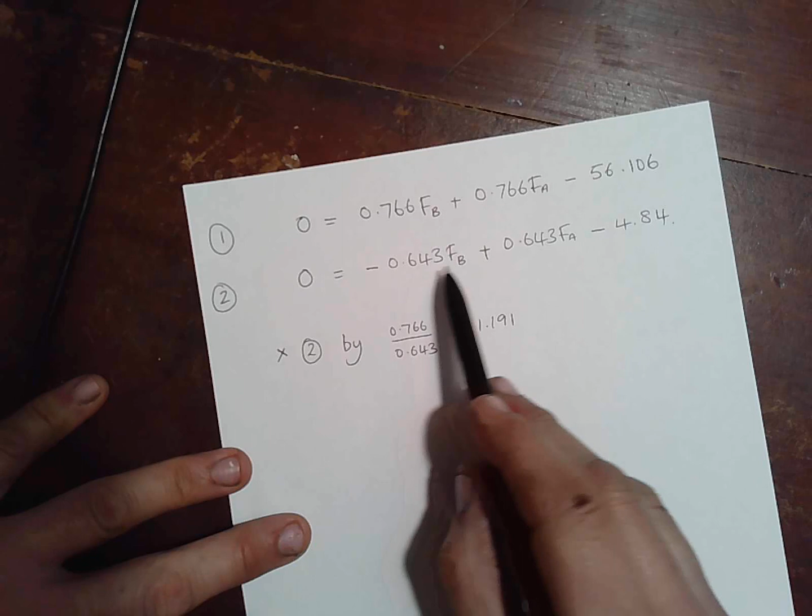simultaneous equations. Now if I'm going to use elimination for these, I'm going to have to multiply one or other of these by a factor so that two of these terms are the same. So I need to multiply this line by a factor that's going to turn 0.643 into 0.766. Actually that's going to need to grow bigger, isn't it? So it's 0.766 divided by 0.643, and I get a number that is 1.19. So if I multiply number 2 by a factor, and that factor is 0.766 divided by 0.643, and that equals 1.191, then what should happen is that the numbers in this increase to match the numbers in this.

Okay then, so let's do that. Multiply equation 2 by 1.191. So I've got 0 equals, and now this should work, I'm just checking it on my calculator, 0.643 multiplied by 1.191 equals, as near as we're going to get to, minus 0.766 FB, plus 0.766 FA minus, now I've got to multiply that

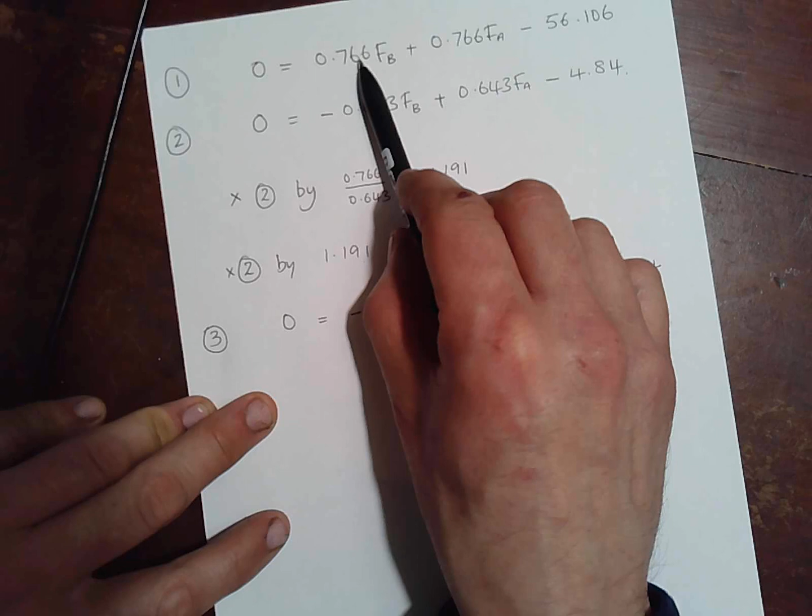4.84 multiplied by 1.191, hang on, sausage fingers, 4.84 times 1.191, so that comes to 5.764. So I'm going to call this one equation 3. So we found our multiplying factor, that if we multiply this line by this factor, then these numbers will change and become very close to these numbers, if not the same as these numbers. And then that's my adjusted equation 2.

And what I'm going to do is I'm going to take that one and equation 1 and then add them up. So you'll notice that this is minus 0.766 FB and equation 1's got a plus 0.766 FB, so if I add them two together, those two terms will cancel each other out. So we've got 0 equals, it's complicated this, isn't it, 0.766 FB, so this is equation 1 I'm bringing down, plus 0.766 FA minus 56.106.

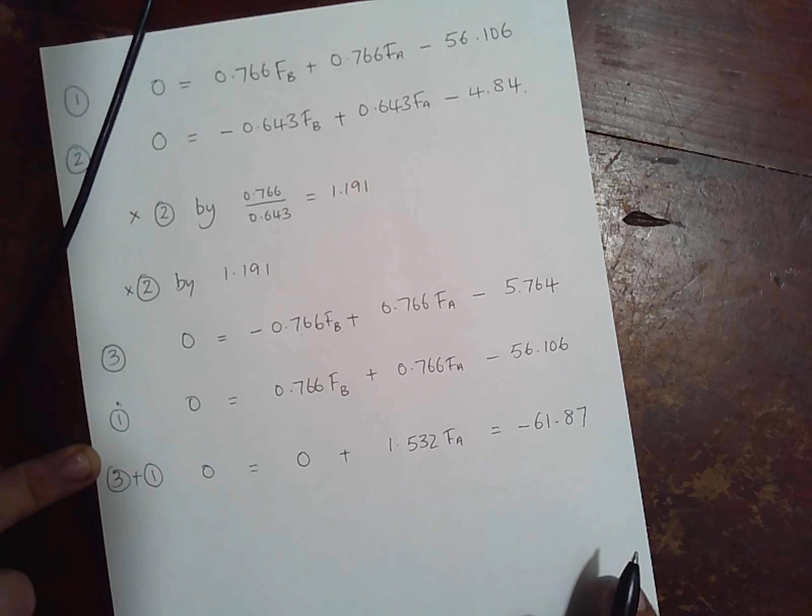Right, so I'm going to add these two lines up now. So this is going to be 3 add equation 1. So 0 add 0 is 0. Minus whatever that is FB add whatever that is FB is going to be 0. And then we're adding those two together. So that is going to be 0.766 times 2, which is 1.532 FA, and that's going to equal those two things added together. If you add those together, they're just going to get even more negative. So we've got minus 5.764 add minus 56.106 is minus 61.87. That shouldn't be an equal sign, that should be a minus sign.

Now we can find out what FA is, because we've got one equation in one unknown, and if we rearrange it, we know this end's equal to 0, that 0 will disappear. If I rearrange this, basically I've got 0 is 1.532 times FA minus 61.87, so I know that 61.87 equals 1.532 FA, and so I know that FA, crikey, equals 61.87 divided by 1.532. Whew, tired now. That equals 40.39, and what was my original layout like? Kilonewtons.

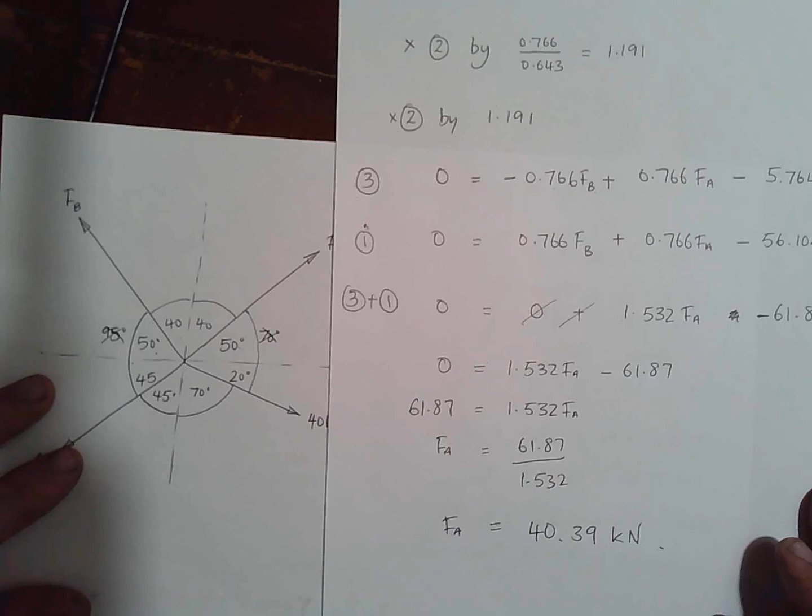Right, so does that make sense? Well, it's positive, which is acting in the positive direction, so that kind of makes sense, doesn't it? So that's my magnitude of FA sorted out. Then what I would do is, in the age-old tradition of simultaneous equations, go and stick FA equals that into one of these up here and calculate what FB is. So that's a horrible, horrible, complicated, nasty question, but still not finished because we've still not found FB.

But there is a question very similar to this in your assessment. Then substitute FA into 1 to find FB. Crikey Moses. So that's what we need to do. That's the type of question that's in the assessment. It is complicated. It's because of the number of forces that are involved, and the fact that it's not simply just forces that are involved. You've also got to start doing simultaneous equations as well. Tricksy. So you'll need to have a look through that. Last thing today then is go and substitute FA equals 40.39 kilonewtons into any of the above and find what FB is for me, and then we'll call it a day.

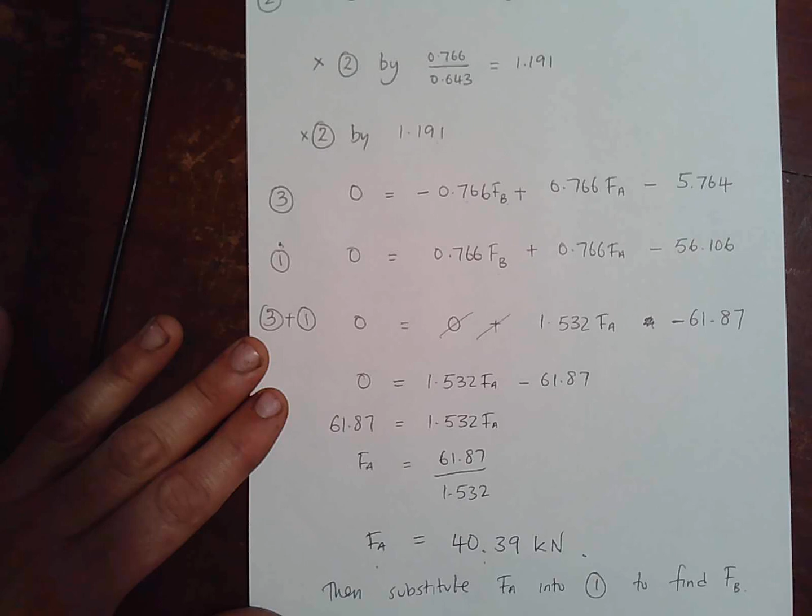It's a three pieces of paper question to answer that one. You're still awake? So I'm going to do it on a bit of paper. You're going to work it out and tell me the answer. So all you're doing is you're substituting FA equals 40.39, and you're substituting that into one or the other of the ones at the top.

So we're going to have, I'm going to substitute that into equation 1, so I end up with 0 equals 0.766 FB plus 0.766 times 40.39 minus 56.106. And we need to rearrange that to find FB. So what does that work to be? So that's 0.766 multiplied by 40.39 equals, take away 56.106 equals that. So we've got 0 equals 0.766 FB minus 25.167.

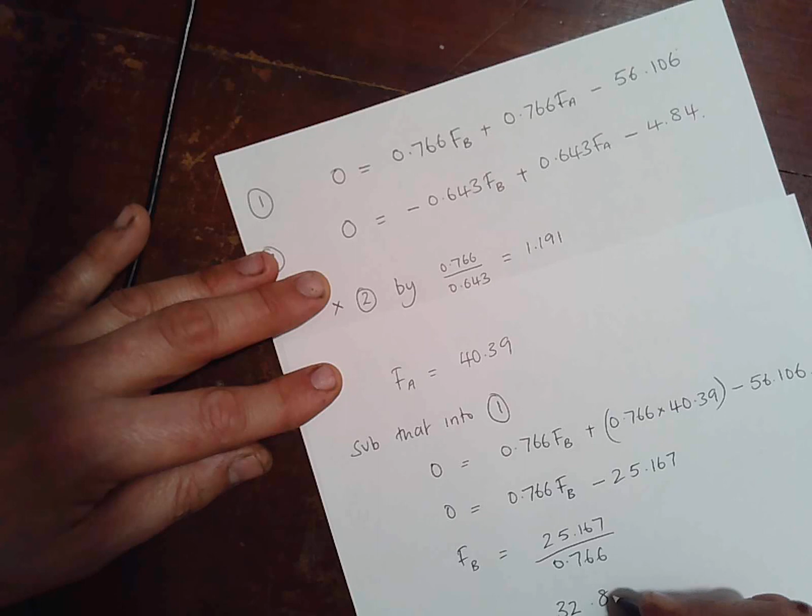So FB equals 25.167 divided by 0.766, which is 32.86 kilonewtons. You get that? So according to my calculations, that is that, and that is that, and that took 3 pages of working.

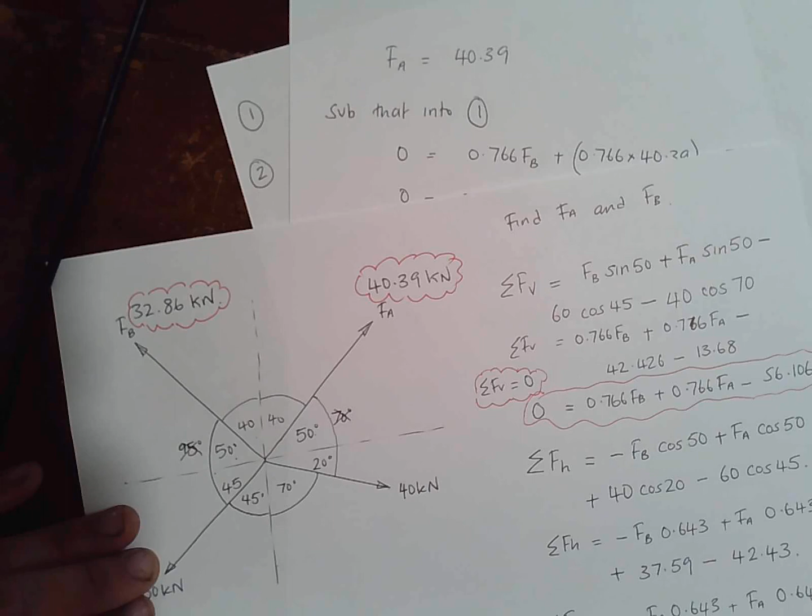Now what I'd be very tempted to do now to make sure that I've got these right, because that is just working from scratch, is to then go and put those values back into the original formula to make sure that they actually work and do sum to 0. In both of those. You never know, we might actually have got it right at that. Okay, so that one's a bit naughty.

What I suggest you do is, well, I'll try and get a copy of this video out to you. Have a go at them as I've introduced them. Get a bit of paper out, see if you can follow the working. If you can't, then just incrementally play a bit more of the video and catch up a bit and try and follow what I've done.

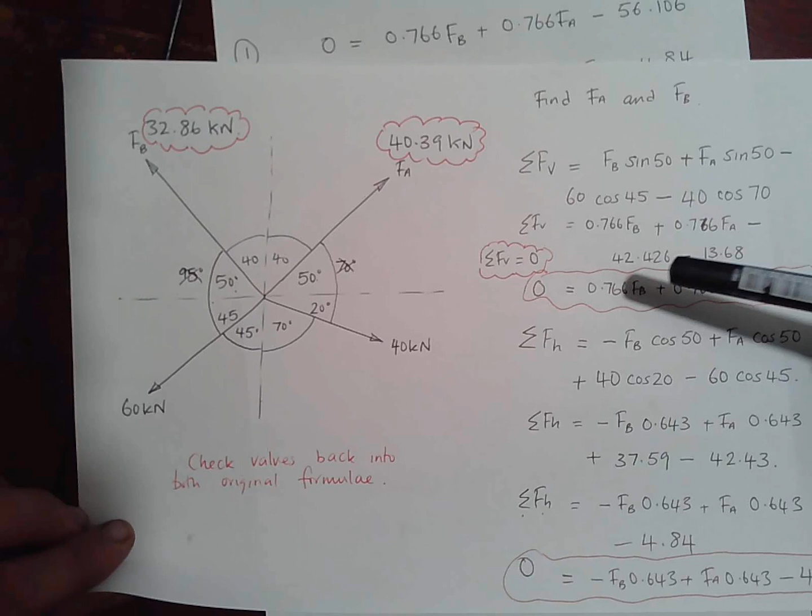So just to recap that last one there then, because that is by far the most complicated one. It involves you resolving the forces into vertical and horizontal components. You know, because it's in equilibrium, that they will equal 0 in the end. So you end up with 2 equations that are simultaneous equations, both have FAs and FBs in them. Then you need to set up your simultaneous equations for elimination. So you need to find this sort of multiplier, this common denominator type thing, which will allow you to multiply one line of this in order for the prefix of FB or FA to be the same, so that when you add them up or take them away, they disappear.

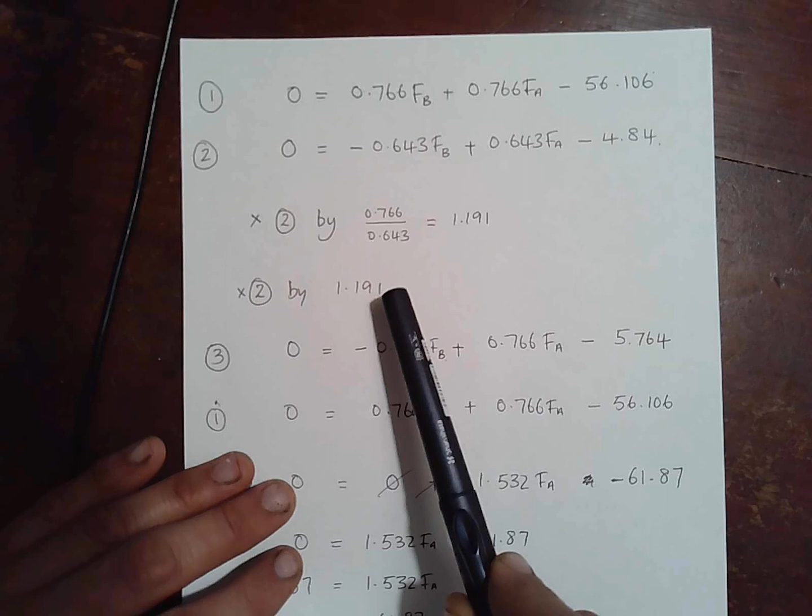So in this instance here, we've multiplied 2 by 1.191, and that gives us this line 3 here. And then we've taken 1 and brought it down, and we've added these up. And we're adding them up because this is already negative and that's positive. If that was positive and that was positive, then we'd take them away from each other. But because they're opposite anyway, if I add that to that, then the term in FB will disappear and will leave me with just terms in FA. And once I've got FA on its own, I can calculate what it is. So stick that in, calculate what FA is, then substitute FA back into one of the original formulae that we worked out to find out what FB is.

Tricky. Okay, anyone desperately lost? I suppose probably there is. So it's down to you to go and have a bigger look at it, because it's not going to get any easier, and the only way to tackle these things is by going and giving them a go.

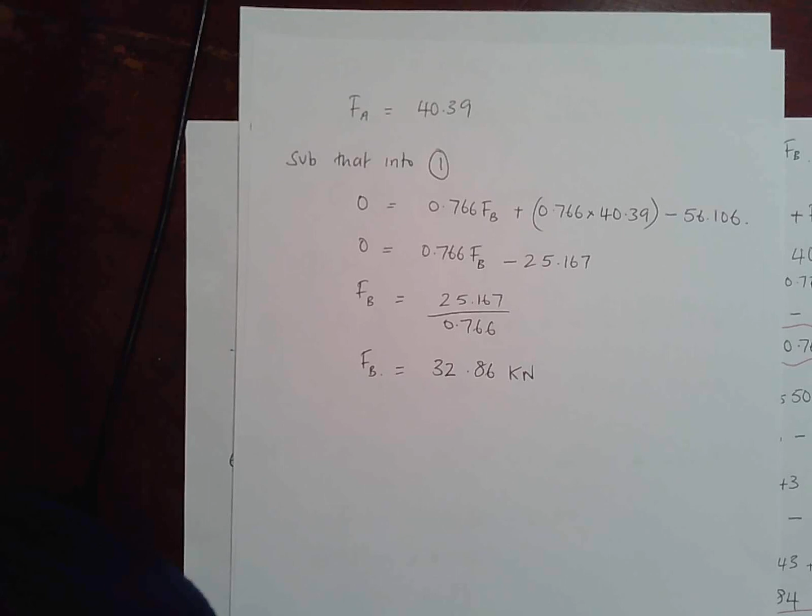Is that all right? Okay. So like I say, next time, the first week before Easter, it'd be nice if we could do the assessment for this, but you may not be ready for it. We might have to do some more practice questions or a practice paper, because there's no point in hiding. If you can't do this, if you don't get it, then we need to get you into a situation where you're more comfortable with it so you can pass the assessment.

And having said that, I'll say ta-ra. Who's missing? So Logan's missing, and who's the other one? Logan and Harry. So Logan and Harry, I'm assuming they were all on strike, I suppose. Didn't have the common sense to get in touch like Byron did. Okay, so I'll see you next time, guys. I hope that wasn't too tedious. I found it quite entertaining, but I'm a bit weird.

You comfortable with any of that, Kamal, or do you hate it all? Okay, cool. Yeah, that last one is a difficult one. It's just lots of it, that's all. It's not particularly any more difficult than the others, just a lot of it.

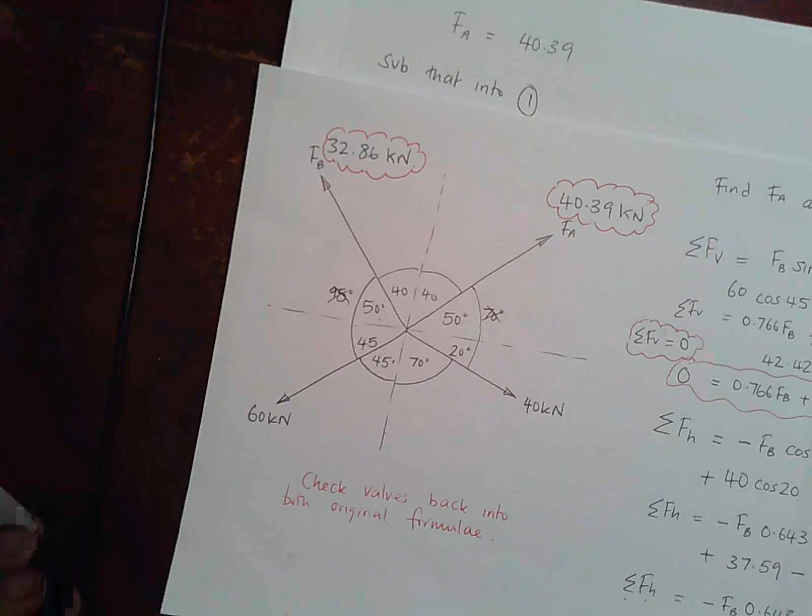Oh, by the way, stop what you're doing. Don't leave yet. Oh, you're leaving already. Oh. It's just me. Okay, have you filled out that thing that I asked you to fill out? Right, cool. If you just come back on, Byron, can you? I dropped a message to fill out some sort of review thing. Oh, he's gone again. If you have, that'd be great if you could fill out as many as you can, please.